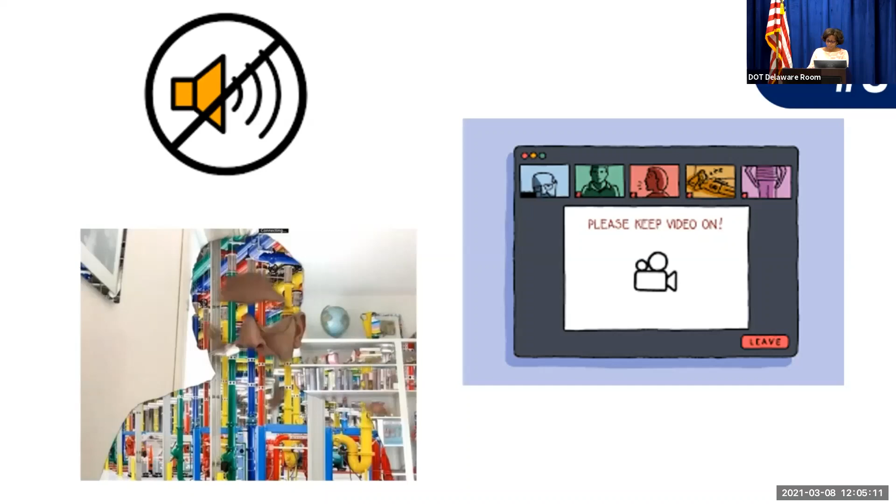I personally, when I meet with people, I like to be able to see their faces. Obviously, in larger meetings, it can be a little more challenging, but it's really important to connect that way, especially when we have to be virtual. We've also learned that backgrounds can be funny and awful - we don't encourage them very much, but some people have come up with really creative ones. We've just learned to use the technology and make it work for us.

Number 7, and it's a serious topic: while we saw volumes plummet at times early on in the pandemic last year, we didn't see speeding and crashes go down at a proportionate rate. We were fortunate in Delaware to see a decrease in fatalities year over year from 2019 to 2020, but 2019 was a very high year for us. The fact that we still had 113 people lose their lives on our roads is a big deal, and we still have a lot of work to do in safety to continue driving those numbers down.

I want to talk about virtual public involvement because that was a huge change for us. We were used to doing virtual public workshops where we might post slides online, do a survey, maybe even have a video. But trying to actually engage with people virtually was truly a learning lesson, and we challenged our teams to think differently, to get outside their comfort zones and do live Q&A on Zoom or WebEx to engage with people.

We had the 5 Points Working Group continue meeting virtually. We had numerous public workshops that had to be virtual. We even, for the Route 1 and Cave Neck Road GSI project, had AECOM develop this virtual meeting room, which was really cool - you felt like you were actually in a room with staff, walking around and touring the different boards.

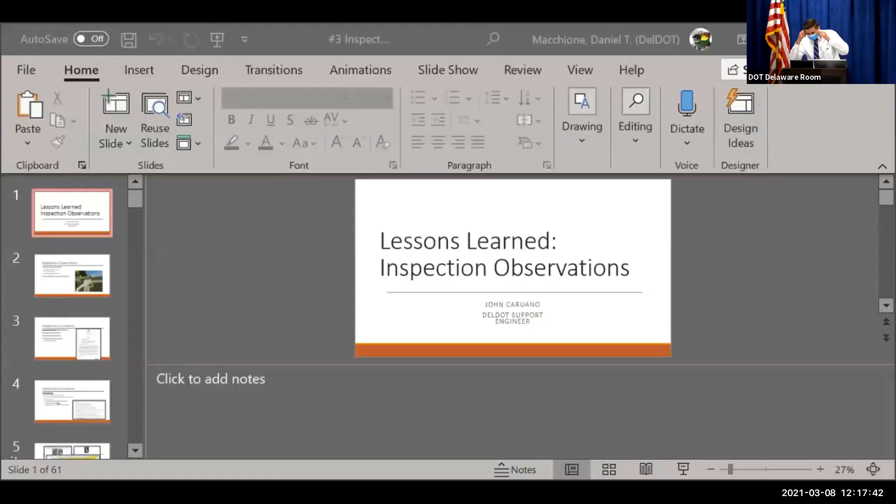My name is John Caruano. I am the support engineer, and I will be presenting on some inspection observations. I want to focus on the framework again that we talked about at the winter workshop a little bit, as well as diving into some good examples and some lessons to be learned from those primary inspections.

The framework was established to be effective March 1st of 2020, and it replaced the old semifinal and final inspections with an initial and primary. It also outlined which staff should be attending these inspections and had the goal of alleviating the multiple punch lists that were presented. The final goal is really to get a faster acceptance of our projects, and we did that through the use of timeframes established in that framework.

The initial inspection was supposed to be completed by the administering section prior to the contractor demobilizing or substantial completion. The administering section will then create an initial punch list of items. They're to include E&S deficiencies, ADA inspection results, safety and bridge management list. That list is to go to the contractor within 7 days, and the list should be an itemized list of the deficiency, the location of the deficiency, and indicating financial responsibility.

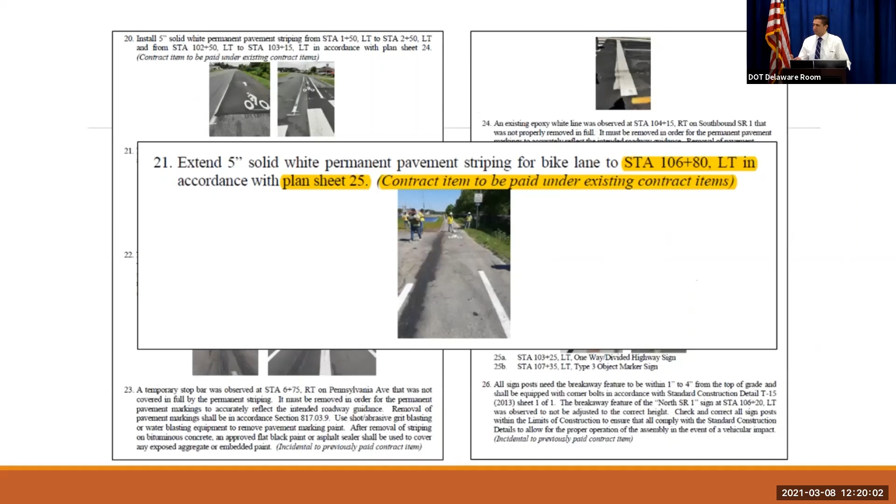The administering section is also responsible for maintaining that initial list and documenting when the contractor has made the corrections to those items. This one on top shows us the list itself with the annotation in red from the area engineer indicating that those items have been completed.

They also did the same thing on an ADA inspection where they put some notes as to how they addressed some of the ADA deficiencies and indicated when that work was corrected so that they could go and schedule the primary inspection.

The primary inspection, again, is scheduled once all those initial list items are addressed, and you'll coordinate with engineering support to schedule that date, and then you'll invite those other groups that are listed on there. You'll meet on site, walk the project, review it, identify additional items that might still be outstanding, discuss the list at the end of that meeting, and then the administering section will create a primary punch list and send it out within 7 days to those that were there attending the inspection for review, and then in 14 days it goes to the contractor.

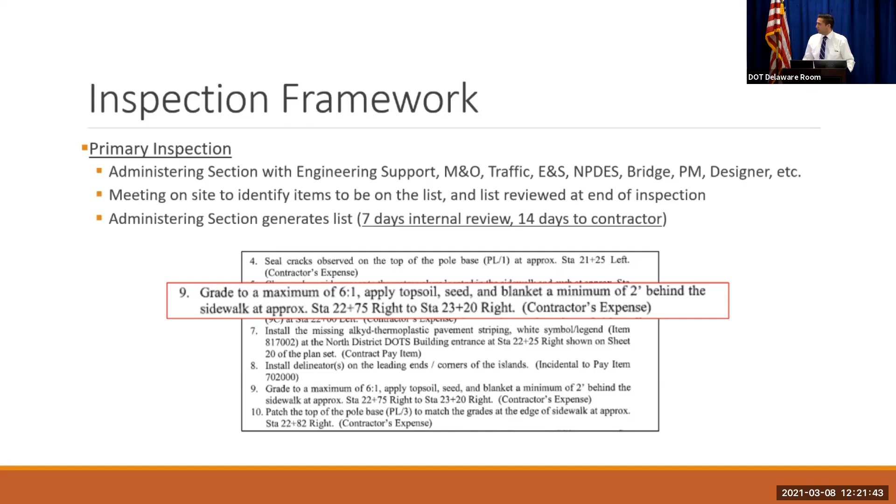Here's just another example of that primary list, telling to grade at a maximum of 6:1, apply topsoil, seed, and blanket at a minimum of 2 feet behind the sidewalk. Again, it gives you the station count, so it's easily identifiable where that is, and it indicates that it's the contractor's expense.

Engineering support attends the primary inspection, and they're there to be a resource for people, identifying specs and details, the contract requirements, and they end up generating our own reports for departmental documentation, for education, and for best practice development. So we put these reports out there identifying things we saw on those inspections and citing specs and details where those requirements are found as a means to educate people going forward.

So we have monthly inspection meetings after we put all these reports out. Right now we're averaging around, I'd say 12 to 14 reports a month. So we'll put this list out and invite the area engineers to attend, and we talk through some of these projects and what we saw on those inspections.

Jansen will go through and identify a few things that he'd like to bring up for discussion to highlight. And then those people that are present are free to discuss those items. They can bring up items that they choose to. It's mainly to exchange ideas and make sure we're doing things correctly, and identify any areas that we might need to make improvements on, whether or not we have to make an improvement to a spec and detail or a process, that could come from these sort of meetings.

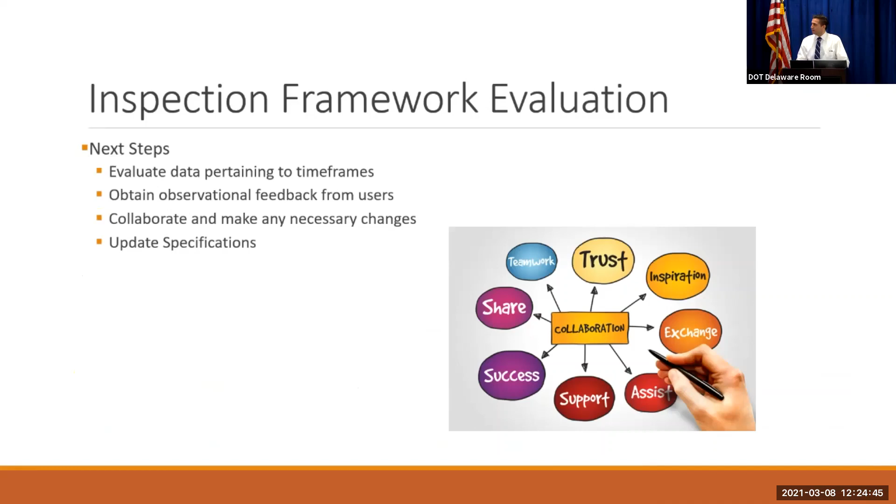So where are we now? It's been about a year that this framework's been in place, since March 1st I think I said. So we're in the process of evaluating some of the data that applies to the time frame for this framework. We're also obtaining observational feedback from some of the users to see what's working, what's not, what needs some tweaking. Then we'll collaborate with others to make the necessary changes and update the specifications accordingly.

So I did an informal poll of some construction, maintenance, engineering support, and BCA members to see how we're doing with this framework. I asked a few basic questions. One was, what are the biggest challenges you see with the framework?

Some of the challenges included getting the initial inspection prior to substantial completion - it's hard to have that inspection if not all the work's completed. The time frame to get the initial list out is hard to meet because the initial lists are going to be a little bit longer now. Also, someone expressed that they're not getting a list of items for those that can't attend the primary inspection - they're not receiving that list ahead of the inspection. And the terminology still seems to be an issue because it doesn't match the contract documents.

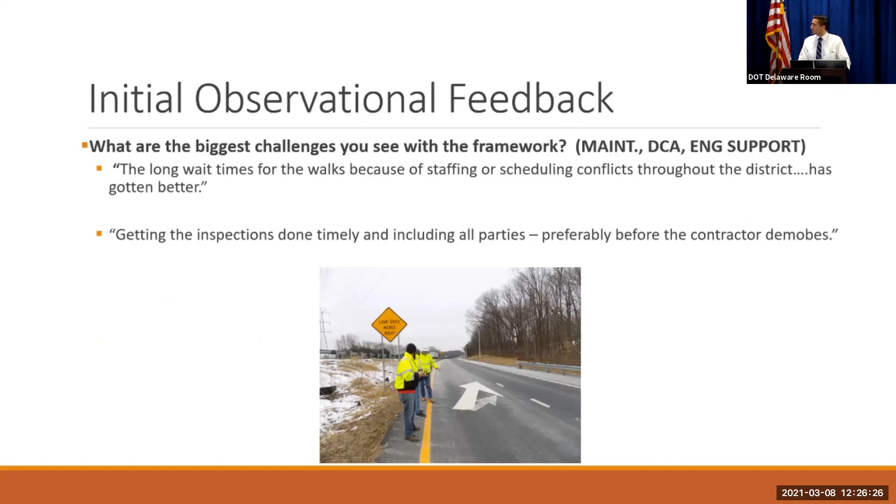All right, so what works well? People outlined that the framework adequately outlines the process and makes it clear and provides consistency for all involved. When it's early and all parties are represented, it's a lot more efficient, and scheduling the primary doesn't take as long as it once did. Somebody also mentioned they like the annotation of the checklist.

There was also an expression that the designer and engineer of record should attend the initial inspection because there's some things that can be worked out then. Also, EMS and safety should be invited to those, and the time frame for the contractor to address the initial punch list should be outlined.

These were some DCA comments. They wanted to decrease the time frames to get the official punch list from initial inspection back faster. They also thought the ADA inspection should be held before the initial.

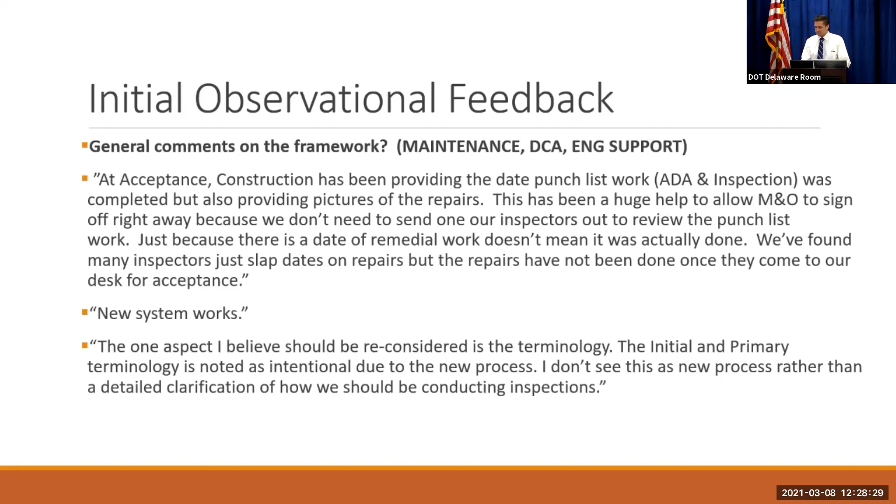So that was just some feedback. Again, in the near future we're going to be looking into the data a little bit more and going through those comments more individually. I just wanted to give you some snippets of what people had said on that informal poll. So now I just wanted to talk about some of the things engineering support sees on our primary inspections - some lessons learned, some good examples going forward.

I realize there might be a perception that engineering support comes out here to tell you what you're doing wrong, but that's really not the case. We're here not to be the police or internal affairs - we're here to educate people and make sure we're getting the quality in the product that we desire.

Does it match the contract documents? Do we follow the specs and details? Is it actually a safe installation for the traveling public? That's really the goal here, and we want to foster a dialogue. We'll ask you questions as to what was done on the project, and we can only really see what's on top, so we're going to ask you what happened underneath.

So we're here to help. We're not trying to point fingers. We're just trying to get the best out of the best product that's possible.

So here's an example of some good pavement down near Northeast Front Street. Nice paving project. Got rumble strips and nice striping.

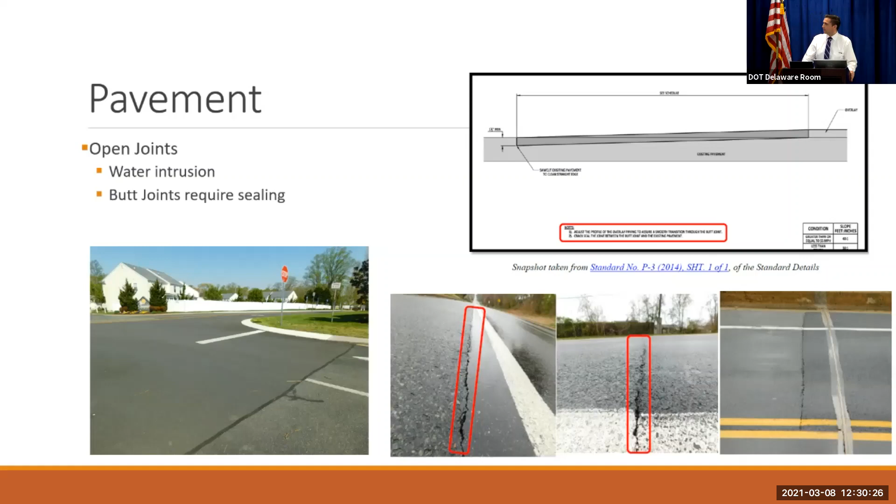I just want to talk about some items here going forward. Open joints, we've seen a couple of these along the edges of road or tie-ins or at butt joints. We're not sealing those. This could allow for water intrusion to happen. The picture on the left is a good example of a butt joint seal. If that water gets in there, it could cause premature deterioration of the roadway.

Again, some sealing, the patchwork should have a seal around it. The manholes in those pictures and junction well, those all have good seal. And there's a nice seal in the upper picture where there was patchwork done along the curb and sidewalk.

So we've seen some sumps on some of these projects. You can see in the photo there's some depressions, some even holding water. So we'll ask the question, what's going on here? Is there a compaction issue? There's a tolerance in the specifications that you can only have a quarter inch deviation in both the longitudinal and transverse direction in 10 feet, and that should be corrected. So those are some of the things we'll ask about.

Pop outs, we want to fix those. Sometimes there's a bonding issue and the aggregate will separate and pop out. This could prevent more premature deterioration of the pavement. Also, there might be an adhesion problem and we might get shoving of the pavement.

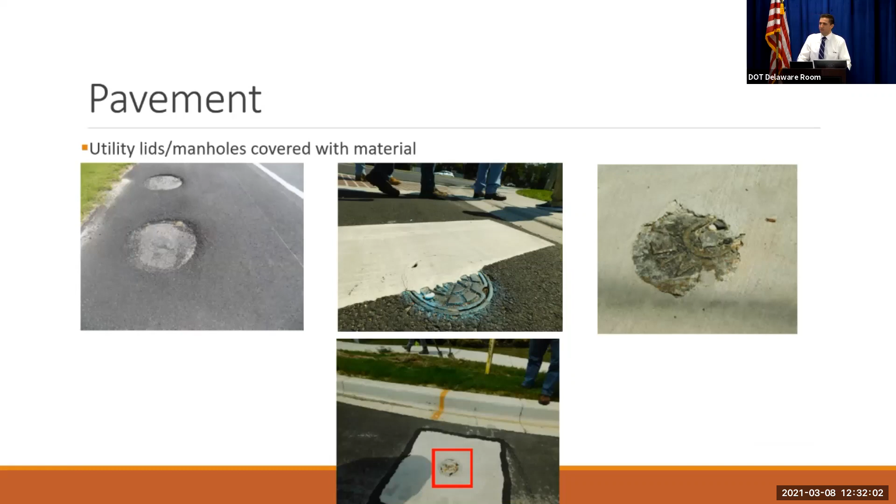Utility lids and manholes covered with material. We want to make sure that these are accessible at a later time. Can we get in that manhole if it's covered with hot mix? Or can the utility company get in there? The bottom picture is a good example of a seal around that utility. However, it's covered in concrete, so it's going to be challenging for them to get to at a later time.

Rumble strips. This is more so project scoping and design. I brought this up because you want to make sure you know what's going on just outside your project limits. Did they exist prior to the project? Does my project cut off a section of rumble strips that did previously exist? You want to include those items and details for that. Also, we realize that project development takes several years, so when you go out to PSE, you might want to double check the site conditions to make sure there hasn't been a project come through to put in rumble strips.

The same thing with raised pavement markers. Make sure we include those items. Make sure they have the right lens colors and orientation. Between two lanes going in the same direction, they'll have the white color, but down the center line you'll have the yellow. And this installation here on the left, there's a little bit of epoxy covering the lens, which makes it difficult for the traveling public to see the lens. So it's losing its effectiveness.

Signs, everybody's favorite. I kind of left this in for Jim Pappas because he loves hearing about the sign sleeve height. But yeah, it's not supposed to be more than 4 inches. I'm not going to stick on that too long. And if you have the double sign blades, with the sign that's got the 6-inch height and lettering, you should have that pin assembly shown on the right there between the signs.

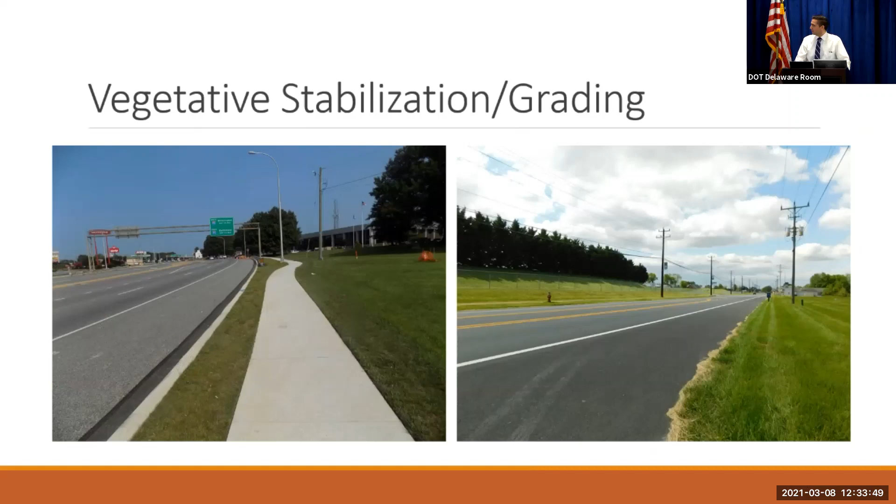Blanket mulch must be identified on the approved product list. You don't want to be using the photodegradable products. It should be biodegradable. You don't want that plastic netting in there. And it should be adhered to the surface so you don't get erosion happening underneath that blanket mulch.

All right, so we have a lot of structures out there, sign structures, light bases. We should only have the top of those bases 4 inches above grade, so we'll have to grade around some of those to make sure we achieve that. Also for utility valves, junction wells, and other appurtenances, you want to do the same. You want to grade those flush. Sometimes we have a mower, maintenance mowing operation going through there, and those could stick up and hit a mowing deck pretty severely.

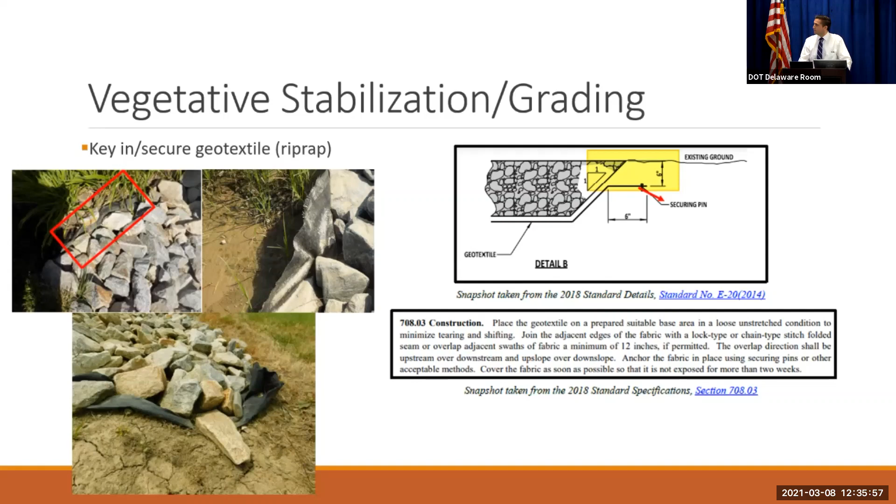And obviously, I think we should remove any sediment or vegetative buildup that is present and impedes flow within our drainage network. If you're seeing like a tree grow out of the end of a pipe, I think you might want to consider removing that, just to make sure it's going to operate as designed.

For our pipes, we recommend that the lift holes be patched, so you should be filling those in to prevent any sediment or water to pass through. Same thing with the ends of pipes when you cut them off. Some exposed rebar, we recommend that those should be patched as well to prevent deterioration. Also the safety grates, they should have their locks up on the top right. You can see that's missing.

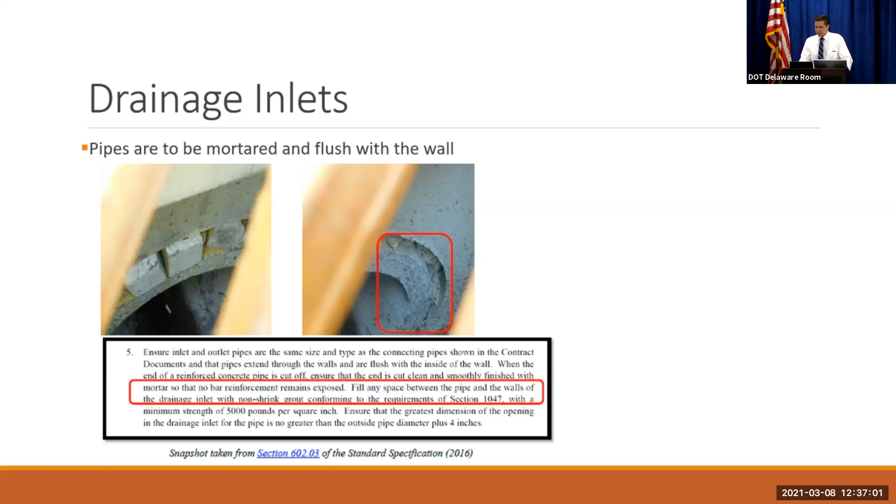Pipes, when they enter the drainage inlets, are to be mortared and flush with the wall. Use a non-shrink grout between the pipe and the wall, the DI.

So steps should be provided in drainage inlets that have a top slab or are greater than 4 feet in depth from the top to the lowest invert of the lowest pipe. And those steps are to be no more than 2 feet from the top of grade for the first step, and the bottom has to be 1 foot max from the lowest invert. The steps basically go into the wall of the box 3 inches and stick out 6 inches. Typically, they're found in the back wall of the inlet, but I think we've made exceptions because of the pipe orientation.

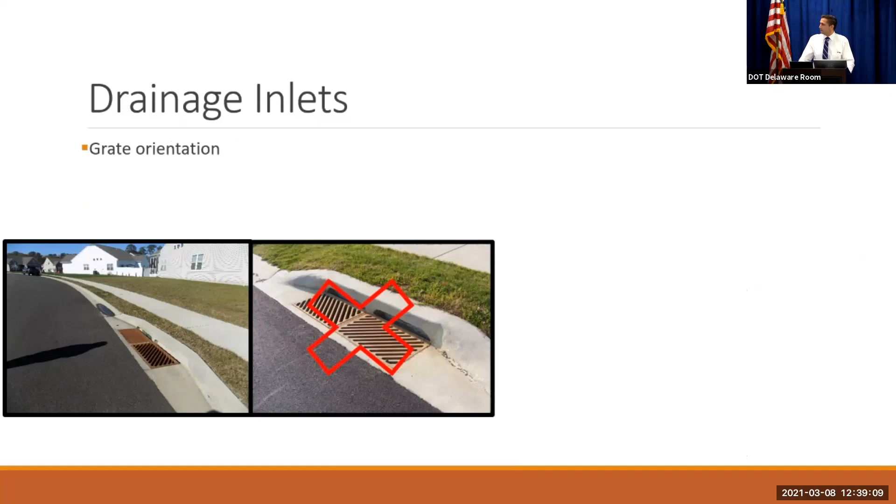Grate orientation - if I had an audience, I'd ask you which one is not correct for a sump condition. It's actually going to be the one on the right. The orientation should be pulling the water from the flow line into the structure at a diagonal. The one on the right is actually going to force water to bypass the opening a little bit, so it won't be as effective. Those are all in the standard details.

Some considerations for PCC curbs. I was focusing a little bit on design here regarding the gutter flow and drainage. We've seen some times where we just saw curb lines without the gutter, and it had some issues with conveying water down the curb line to the outfall. So when possible, I'd advise to use gutters.

Verify the outfall within the project scoping. A lot of times we tie into a certain location, but there could be a high point just beyond that location. We've seen that where you think you're matching existing, but right beyond existing, there's a higher point that causes the water to back up within your proposed improvements. So don't just limit yourself to the project area, go a little beyond to make sure that your water can drain properly.

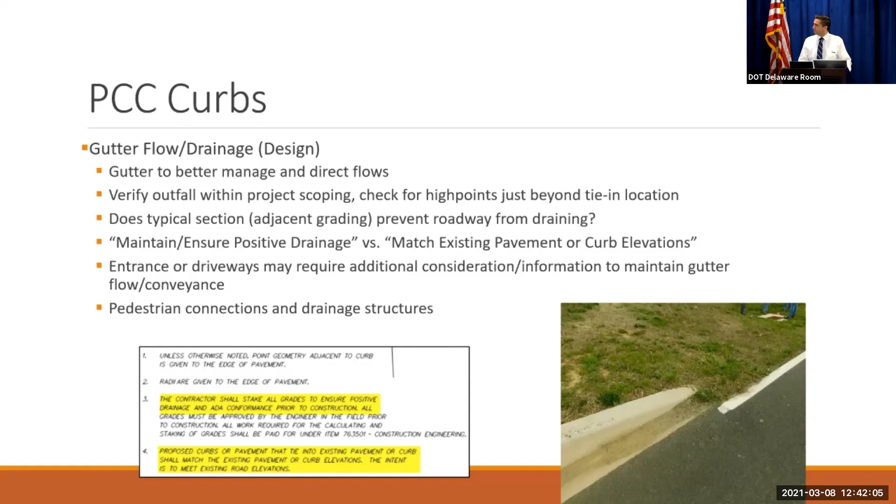All right, so sidewalk and curbs. We want to seal any uncontrolled cracks in the concrete, as well as make sure we cut joints at our 10-foot intervals. There's also the detail to provide a 2-foot at 6:1 grading adjacent to the sidewalk or shared use path.

We've also heard from the contractor that the hinge point causes some problems when you have a 6:1 for 2 feet and then down at 4:1. So when right-of-way does permit, consider carrying a 6:1 all the way down. I know right-of-way can be tight in some spots, so that's not always feasible, but apparently the hinge point had caused some issues with some contractors.

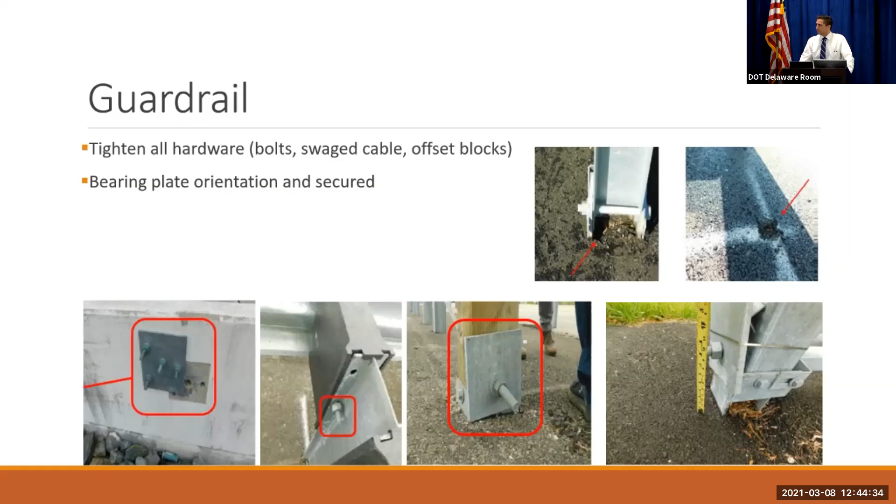Any holes that are in that maintenance paving should be filled. Even those holes in the back wall, the barrier connection should be filled to prevent deterioration of that structure.

So some other thoughts on end treatment grading. I think Adam's going to get into guardrail a little bit later, but from a design standpoint, we should ensure that we have adequate right-of-way for that grading. I think we run into some projects where we have to upgrade and we don't have the right-of-way up front, so we don't provide for that grading. If we have a little bit more forethought to consider that, that would be helpful.

Also, how does that affect the proposed drainage? I was the designer one time and I built per the detail, but I didn't think about what the drainage swale was doing behind that. So if I actually built out that grading that was necessary, what does it do to my swale? Do I have to pipe that area? So think about that.

Also, we have a detail with a guardrail with an omitted post, so you actually don't have that one post in the area where the curb opening would be. When you're doing that omitted post detail, you want to work from the end treatment back and look at your spacing, and then you can figure out where your first curb opening can be going forward.

We've also had some projects where we were just doing overlays, and it wasn't in the scope of the contract to worry about the guardrail. What ended up happening was we significantly reduced the height of the guardrail, so it's not going to function properly. So when you're doing these overlay projects near guardrail, consider doing a profile milling, or see what you have to do to maintain the 31-inch guardrail height in these sections. This also produced a bit of a lip or drop off, so you don't have that 10-to-1 grading that we had in the standard details for the guardrail. So again, profile mill when possible.

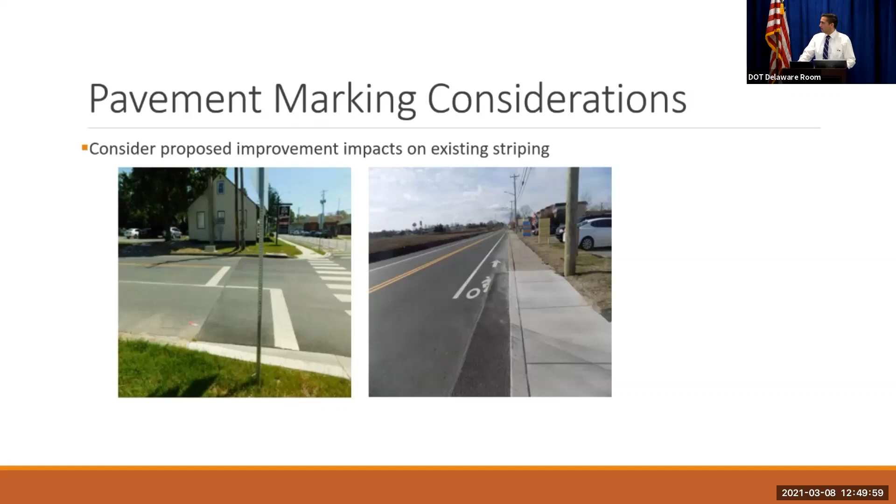We want to be putting asphalt sealer or the blackout paint on the striping removal, and then make sure we're having the right size symbols from the MUTCD for striping.

We've also seen some traffic electric service pedestals that are missing the cross member. There's a lot of equipment on these panels, and it has a cross brace member to keep it sturdy with the wind loads and everything else. Also, we've seen it where it's not meeting the 4-inch requirement for the sign sleeves. I think that's a traffic contractor issue, but if you're seeing that on the construction site, you may want to reach out to them and say, hey, you're missing the cross member.

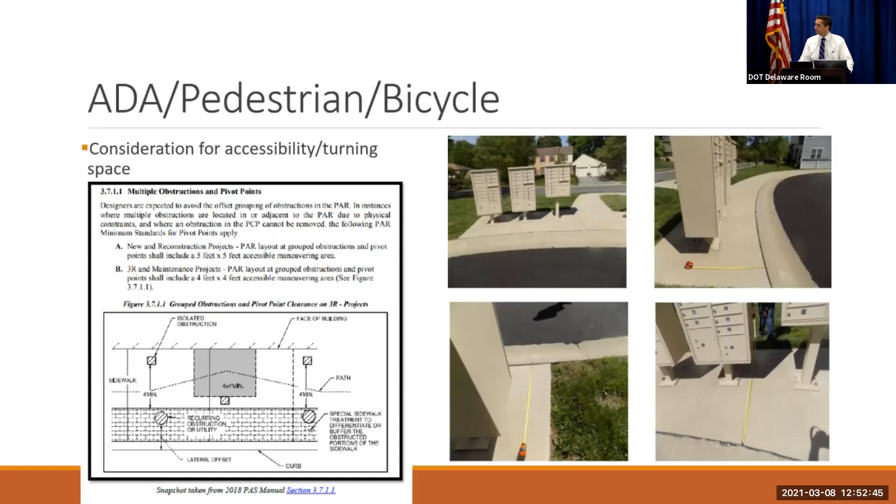Also, protrusions and vertical clearance. We see a lot of branches that overhang our sidewalks, and there's also utilities that stick into our PARs, our sidewalks. When you're scoping this, consider whether there's a way to maintain a PAR and leave the utility in place, or whether you have to do something to delineate that utility. If it's overhanging into the PAR more than 4 inches and between, I think, 27 to 80 inches, you'll need to delineate it somehow. You can use a vertical curb or delineators like a tubular marker, so that if somebody's visually impaired, they can detect that there's something protruding into their walkway. Trim the vegetation, try to avoid utilities within the PAR, and when placing signs, try to make sure they're outside of the PAR when possible.

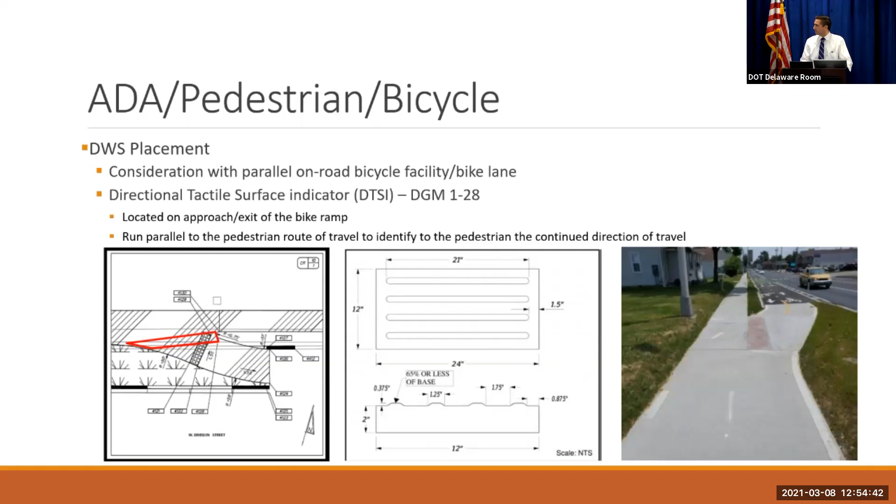DWS, or detectable warning surface, should extend the full width of the curb ramp and the fully depressed curb. This last one is kind of new - we developed a new directional tactile surface indicator. It's essentially a longitudinal DWS, located on the approach and exit of bike ramps. So when you have a pedestrian route and a separate bike route that enters or exits, we use this to indicate to somebody visually impaired that the pedestrian path keeps going forward, but a bicyclist may depart from or enter the pedestrian network there. You didn't want to just use the traditional DWS because it would direct a visually impaired person into that facility, or in this case, into the roadway adjacent to the bike lane.

That's pretty much it. Lastly, I just wanted to stress communication. I think Shantae hit on it well. I realize we're all trying to close out our projects faster, and I think communication is just key to exchanging ideas and improving processes that may need improving. So I thank you for your time.

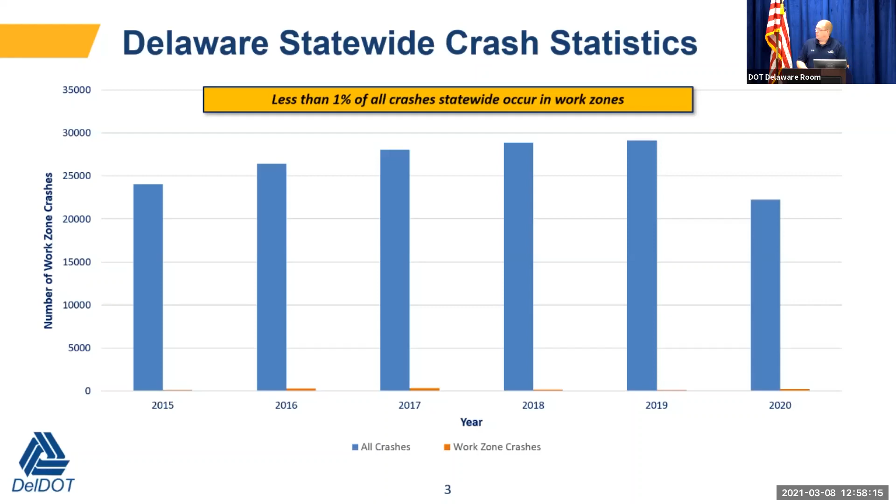We want to keep those numbers down as much as possible. We looked at all different crash severities: property damage only, injury, fatal crashes. Overall, over the last 5+ years, there were over 1,200 work zone crashes, 8 fatalities, 22 serious injuries, 229 minor injuries, and 155 possible injuries. The majority of these crashes are really property damage only, no injuries involved to any people or workers.

We do not know, unfortunately, easily how many workers were injured in work zone crashes. There's no checkbox on the crash report to indicate whether a worker was injured. We do know if workers were present in different situations, but we don't know if a worker was injured without physically reading the narrative and looking at who was involved in the crash and who was struck. So we'd need more information to determine how many workers were actually injured.

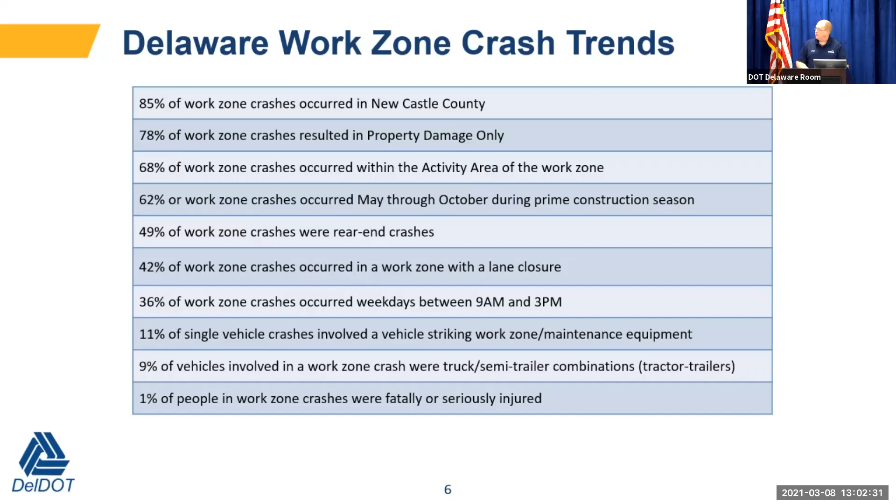So for safety section staff and responsibilities, I wanted to highlight this for Jeff and his staff, so everybody understands the responsibilities of that group and who to contact. Jeff Van Horn is the safety programs manager, and he manages the group that includes special events and hauling permits, which used to be in DMV. When I was in the section, we acquired hauling permits out of DMV, I think 2015 or 2016. Highway safety programs, which is Lei and David, are responsible for the engineering side of temporary traffic control and such. And then the safety officers are folks in the field inspecting and reviewing the work zones.

One of the newer additions, she's been in safety for a few years; she was previously in the hauling permits group and has moved over to the safety officer group. On the engineering side, Lei Zhu and David Wynn are both the engineering contacts. If your projects are in North and Central District, reach out to Lei. She's your point of contact mainly on the design side for TMPs, transportation management plans, detours, coordinating plan reviews, those types of things. David Wynn handles Canal and South District projects, as the point of contact for TMPs, detours, etc., for those project locations.

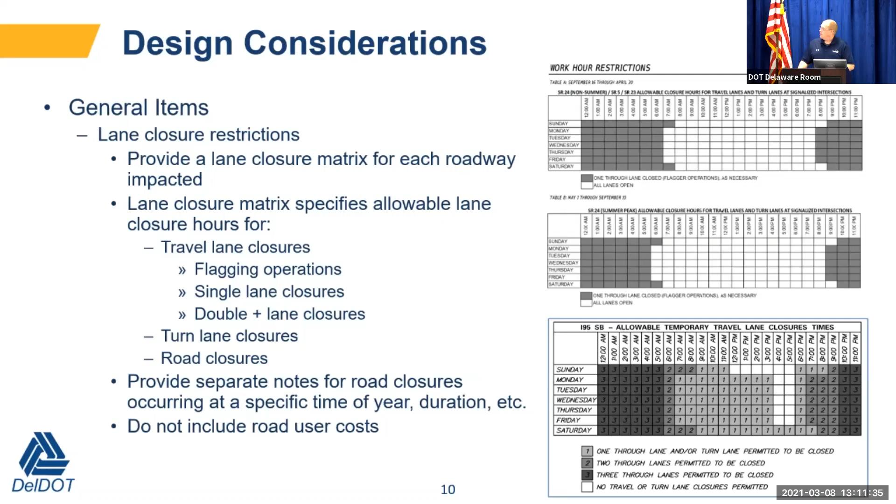TMPs, or transportation management plans. There's been a process change within safety that Jeff asked me to relay. When you're submitting your preliminary plans, you need to request a TMP determination from the safety section. That request will go to David or Lei and Jeff Van Horn, depending on which district your project is within. The draft TMP should be submitted at semifinal for review. Your final TMP for signature is submitted at final or just prior to PS&E.

When you develop your TMP, especially for a larger project with a lot of additional stuff the contractor has to do to mitigate traffic, make sure any TMP requirements that fall on the contractor are included in your MOT plans. So if the contractor is providing message boards for regional diversion routes or other devices, or having to pave a detour route in advance of closing the road and putting traffic on a detour route, make sure all that is noted in your plans, because generally the TMP document is not part of the bid documents. So the contractor won't see that unless it's in the plans. Make sure all that information is included in your plans and estimates, and you've got the cost covered in your project for that.

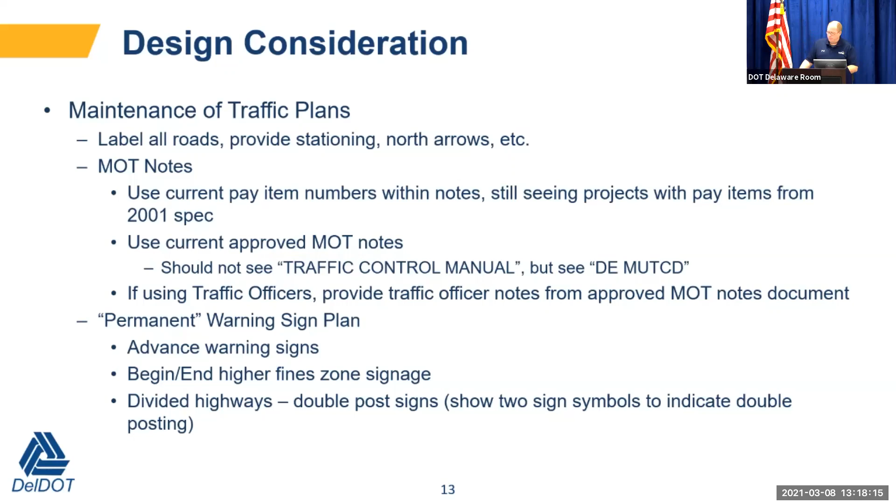On your phasing plans, for pavement markings, we want to make sure that any of the striping that's going to be placed or removed is clearly noted on the plans. There are some inconsistencies when we look at one plan set to the other as far as which striping is going to be removed or placed in a temporary situation.

Make sure that where your temporary striping ties into your existing striping, you have a label that states as such, tie into existing markings. Make sure we're showing that existing striping so we can see how that all ties in. The goal is to make sure the striping makes sense from a road user standpoint and provides a clear path for the road user.

If you have projects greater than 30 days or durations of phases greater than 30 days, consider using the permanent striping items but in a temporary fashion. So in your striping legend or striping schedule, you would have epoxy or thermoplastic markings instead of temporary paint in those situations. The goal there is to minimize the need for the contractor to go out and repaint the lines every 2 weeks.

It will save the department money. It keeps the contractor safe as far as not having to put additional crews out on the roadway to maintain those markings, so keep that in mind. If there's any questions or need for additional guidance on that, contact the safety section. They can help out with that.

I believe Jeff, we had talked about it internally. I believe Jeff may be working with engineering support to probably try to get some additional pay items for those. I'm not 100% sure on that, but I think that email went out. I'm looking at John, he's kind of nodding his head.

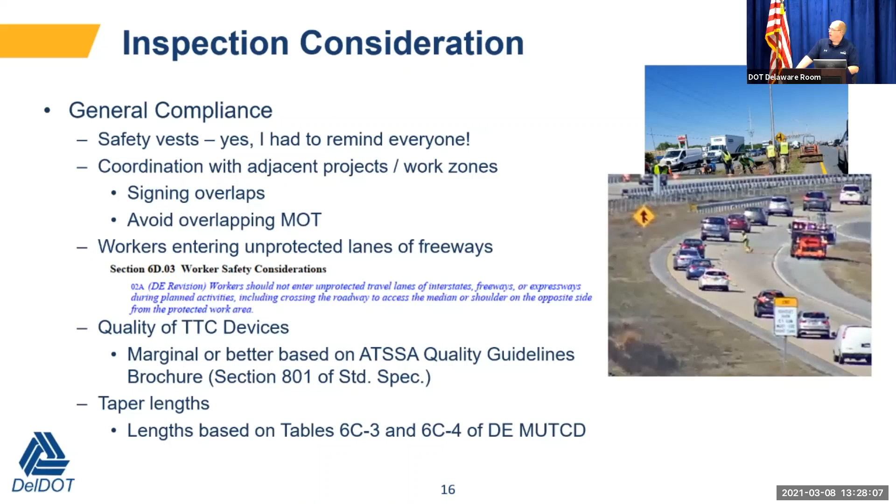We were able to get a picture of this from one of the cameras of this guy on Route 1 trying to cross Route 1 northbound in North Smyrna. He was actually putting his hand out to try to stop traffic while he was running across the street to grab a sign and pick it up.

Quality of temporary traffic control devices. Make sure that, per section 801, our devices are marginal or better based on the ATSSA quality guidelines brochure. So that needs to be addressed in the field.

And then taper lengths. I was asked to mention this as well. The lengths need to be based on tables 6C3 and 6C4 of the MUTCD. They need to be as long as possible to allow for proper shifting of traffic or proper merging of traffic approaching a lane closure or a lane shift.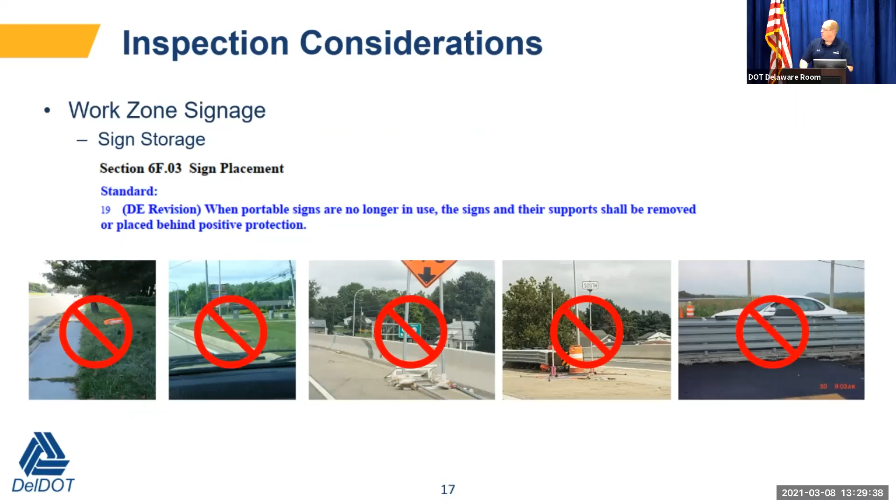Work zone signage, sign storage. At the end of the day, when your signs are no longer in use, they shall be removed from the roadway or placed behind positive protection. So, where we place them - behind the sidewalk, behind the curb, I'm not sure what's going on there. In front of the impact attenuator with no sign on it, or my favorite, on top of the impact attenuator that will go through the windshield when somebody hits it. Those signs need to be removed at the end of the work shift, put back in the truck, put back in the yard somewhere, or placed behind positive protection, not on top of positive protection.

Sign placement, make sure we're using the correct sign. We've seen situations where we try to take a sign and maybe rotate it a different way and try to put it in place for something where it doesn't mean, it's not used for its intended meaning.

We had one recently where somebody took a stop ahead sign, flipped it upside down so the arrow was pointing down, and it was at a stop line for a signalized intersection with the intention of meaning stop here on red, but that definitely doesn't get the meaning across. Unfortunately, I had a picture of that, but it wasn't clear enough to put in the slides.

Make sure we're placing signs in accordance with the MUTCD and appropriate typical applications. Make sure you're using the proper signs shown in the TAs for your lane closures or lane shifts. Ensure that when you're using sign stands like the high pro sign stands, you orient them correctly. For the high pros, it's important because it's how they were crash tested. The short side of the base is installed towards approaching traffic, so the longer side of the base is positioned downstream of approaching traffic.

Make sure signs are visible to motorists. We don't want signs covered by trees or anything like that. And obviously no blocking sidewalks with signage. We want to make sure that pedestrians have a clear path, especially for ADA requirements. We want to make sure the folks that have wheelchairs or are visually impaired have clear paths to walk along the sidewalks and aren't being obstructed by a temporary traffic control sign.

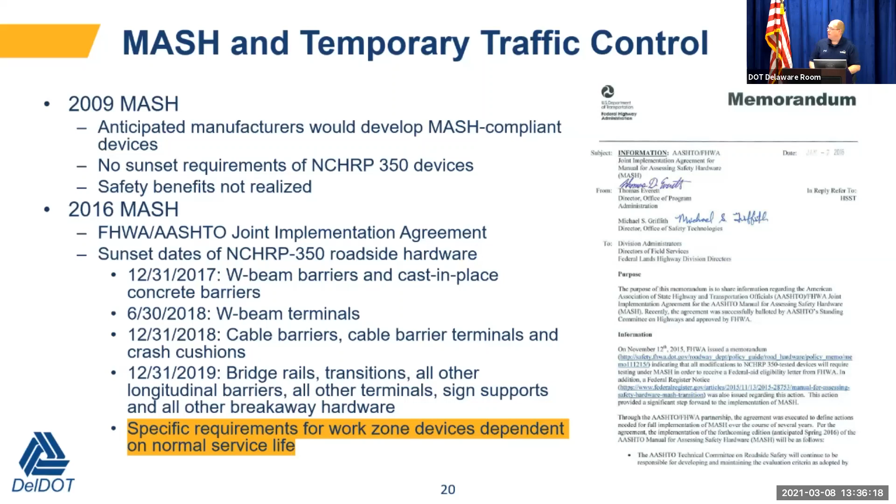Because of that, working with the MASH committee, DelDOT wanted to look a little bit further at this. So in general, from a federal standpoint, devices manufactured after December 31st of 2019 must be successfully tested to the 2016 edition of MASH. So any new devices being manufactured right now all have to be MASH compliant, and that goes for sign stands, type 3 barricades, TMAs, etc.

Devices that were manufactured on or before December 31st, 2019 and successfully tested to NCHRP 350 or the 2009 edition of MASH may continue to be used throughout their normal service lives. So that means the department really has to think about what is the normal service life of these devices. Well, if it gets struck, not long. But for things that don't get struck that often or haven't been struck, we want to realize the safety benefits of MASH, so we want to try to get some of this older hardware off of our roadways.

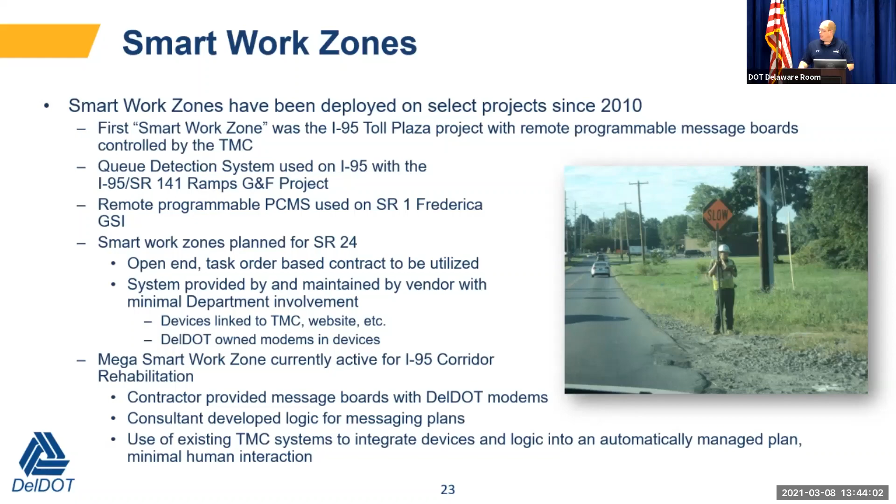If speeds get less than 35 miles an hour on 2 or 3 different detectors on 95 approaching the work zone, then the first tier of messaging is activated. The intention there is to divert traffic off of 95, put traffic on 141, 495, et cetera. If travel times increase on those roads, then the second set of messaging is displayed to motorists, and we try to use other diversion routes like Route 7, Kirkwood Highway, or Route 4. That's in place now, and I have some screenshots of what that looks like.

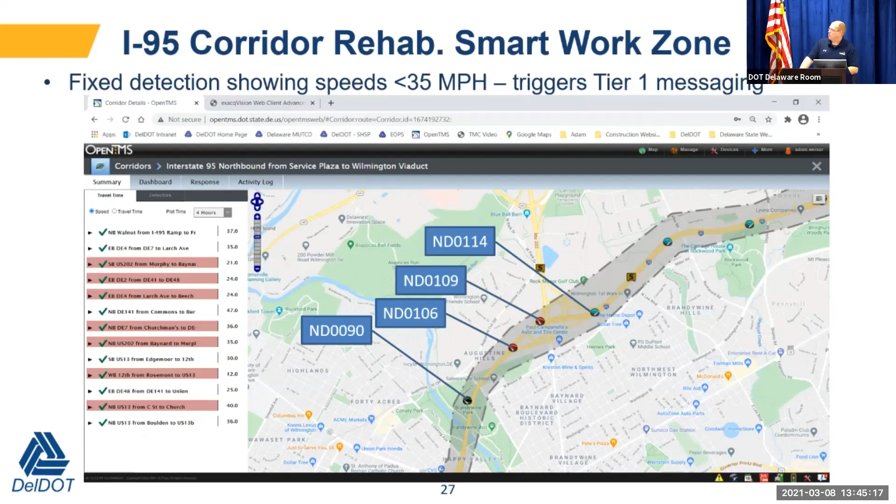The 4 detectors highlighted there are the 4 that were to trigger the first tier messaging. All 4 of those detectors needed to show speeds less than 35 miles per hour. Once we reach that threshold, then the first tier messaging is activated. This is the log that we see in OpenTMS that shows when those messages were activated, and it was around 14:45, or 2:45 p.m., that the first tier messaging was activated.

What ends up happening is we see those messages will activate. In this case, I think the messages were activated for about 5 minutes. The speeds on the detectors actually increased a little bit. The congestion was slightly reduced, and the messages went back to the original messages that were displayed prior, just informing road users of the road work ahead.

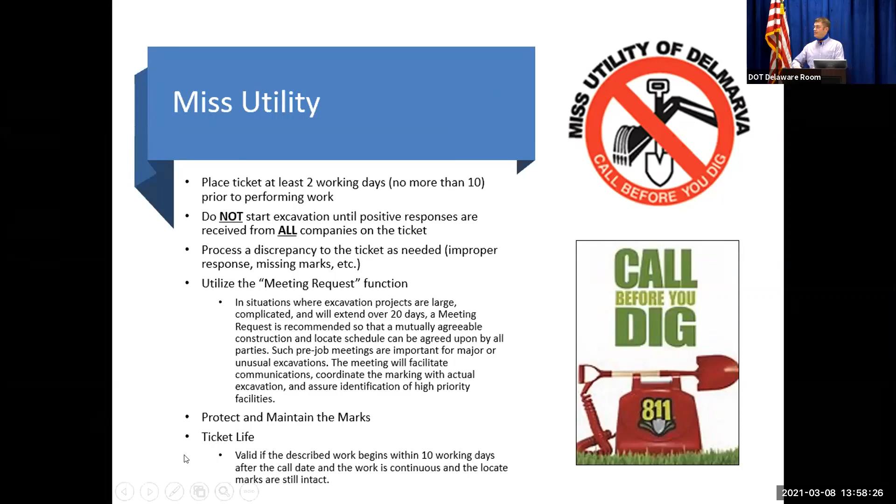So private versus public. It's entirely possible within the project limits of any of our highway projects that you're going to come across facilities that are not owned, operated, or maintained by utility companies. In our world, we'll call those private utilities. Essentially, that's something that's owned or the responsibility of a property owner or a different entity.

Typically speaking, those entities will not be members of Miss Utility, so you will not be receiving marks. For instance, a lateral that runs from the sewer back to a house, you're not going to receive marks once that lateral leaves the right of way. I'll get into that a little bit later. And once that leaves the right of way, it's the property owner's responsibility.

The only way to obtain that information in a lot of cases is to actually get it from the property owner. We don't usually have records of this information. In some cases, when we're coordinating with the utility companies during design, we'll be able to get cut-in cards or something that might indicate where they have service connections. But then once it leaves their responsibility, we don't know what it does.

So then how do you find it? We'll utilize subsurface utility engineering during design, and in some cases that might help us understand and find the facilities. Again, sometimes the utility companies might have something, but really the only way to find a lot of these is to talk to the owner, usually the property owner, to find out what they have on the site. That is not something that's handled through the utility side of the world, and it may be something on projects where discussions need to happen between the design side and the real estate side.

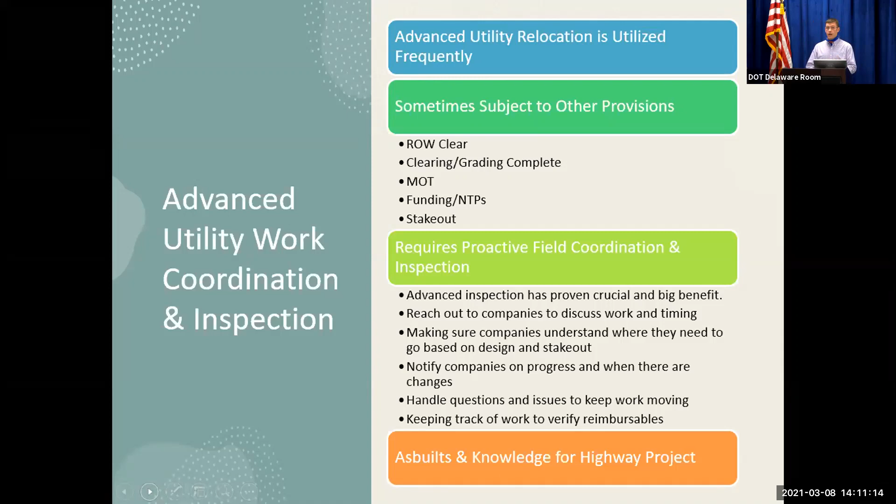And then ultimately, if we have reimbursable work on a project, we're going to want to verify that all of the items that we're paying for were done as they should have been. So my side of the world will end up going back to whoever the inspector was to verify the work happened and that the reimbursables are okay before we pay the utility. And then lastly, just trying to be able to obtain some as-built information and having a knowledge for what's happened on the site for when that highway project comes into the picture.

And then jumping into when the highway contractor comes in. The highway contractor needs to coordinate with utility companies as outlined in our standard specs and in accordance with the utility statement. They need to provide advance notice when needed. Again, that's part of the utility statement. It typically gives the amount of advance notice each utility company requires.

And that needs to be done by the highway contractor. They also need to notify companies of any anticipated changes or approved changes. Again, getting back to what I said in one of the previous slides, this becomes crucial. If something changes, it could greatly impact what was anticipated from a utility relocation standpoint. Either it could make it so utility companies can't perform the work they were trying to do, or that the contractor has now made it so the utility company can't work because they're working in the same area.

And then lastly, just coordinate and communicate with companies throughout the project. That's crucial. As long as communication is going well, then we can get through a lot of issues or concerns. So that's it. Hopefully that provided some helpful insight. I'll take any questions if we have any.

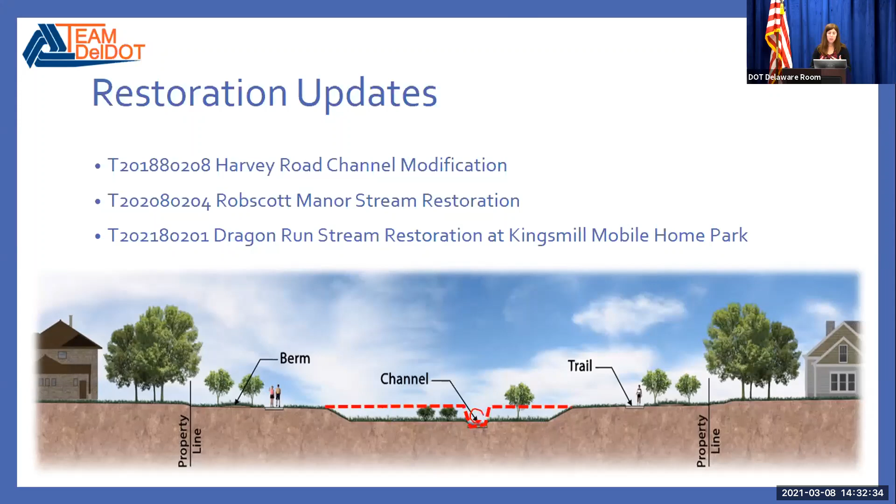Currently, the stream is very incised with steep side banks, and that creates a lot of erosion in the system, as when it rains, all that storm energy is contained in the side banks. It can't release out.

So switching gears into our BMPs, which is short for best management practices, a nickname for permanent stormwater management facilities.

During the course of 2020, we inspected 625 BMPs that DelDOT maintains. That number has stayed relatively the same over the last couple of years, even though we have been accepting projects that have BMPs in them.

We've also worked with PCC and Tull's, who handles the Service Plaza, and eliminated some of those BMPs from our maintenance records because they're maintained by other entities.

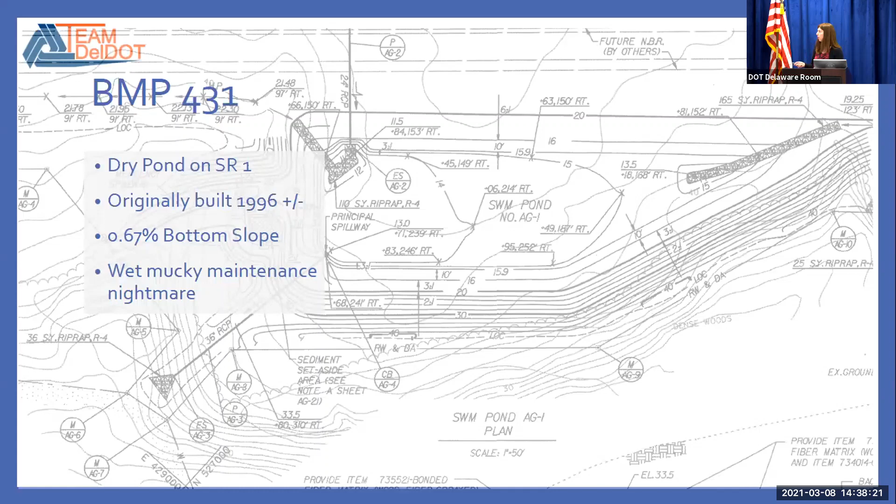The theme of these dry ponds is when you have a very flat bottom slope, they turn into a wet, mucky maintenance nightmare. They don't drain in between storms. They're very saturated, so it's difficult to mow. If we do try to mow, the mowers might get stuck and start rutting up the bottom, which causes more ponding. Then cattails and phragmites love that mucky, saturated soil, so they start moving in, and eventually we get a BMP that looks like this, or worse.

So we came in and put in a low flow channel through the center of the pond, and that provided almost immediate relief to the system. The basin bottom's now dry in between storms. They can mow it. It's really holding up well.

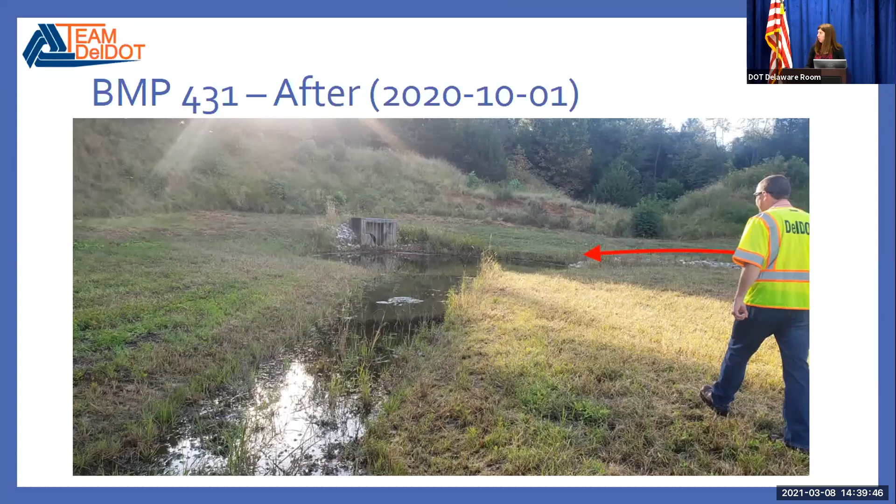This goes back to the original design of the pond. The discharge from the outlet structure was put mid-hill. It was towards the lower end of a steep gradient, but below it is still a significant enough gradient that a large amount of erosion resulted downstream of the riprap protection.

So it's an important topic. I think I've stressed this in other lessons learned or BMP talks that we can't be discharging mid-hill. We have to be bringing that conveyance all the way to a stable foundation at the bottom of the hill. If not, erosion is going to result and we'll have to go back.

Unfortunately, at the time, the erosion is outside of our right-of-way, so an easement would have been needed, and we didn't have enough resources to include it at the time, mostly time-wise, but it's on our list to eventually go back to.

Switching gears to BMP 143, this is on Route 141. This was built in 1987. The details on the plans are pretty much non-existent for the pond itself, but based on the inverts of the incoming pipes and the outlet structure, it was designed with a zero slope in the dry pond.

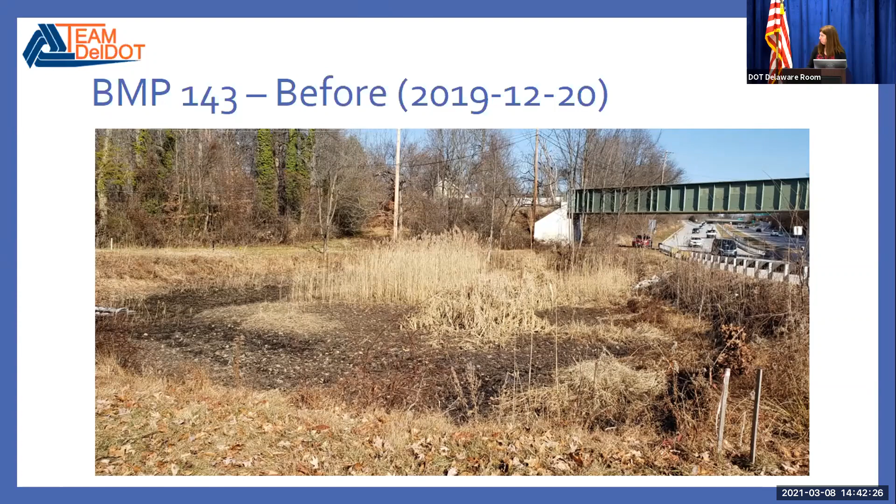The goal of the retrofit was to convert it into a wet pond by placing the permanent pool just under the existing dry ground bottom elevation, and we added benches for depth.

Originally, the design plans called for a new principal spillway and emergency spillway. Unfortunately, just following the utility presentation, a gas line was not marked during the design stages of the layout. Luckily, prior to construction, it was located, so we were able to do a test pit and determined that the elevation would not allow for the emergency spillway to be constructed, since the gas main wouldn't have enough cover over it.

So we ended up leaving the existing outlet structure in as the emergency spillway and cut additional weirs into that box. We were still able to add the new principal spillway because the storm drain pipe was located below the gas line, so we could backfill and still have enough cover.

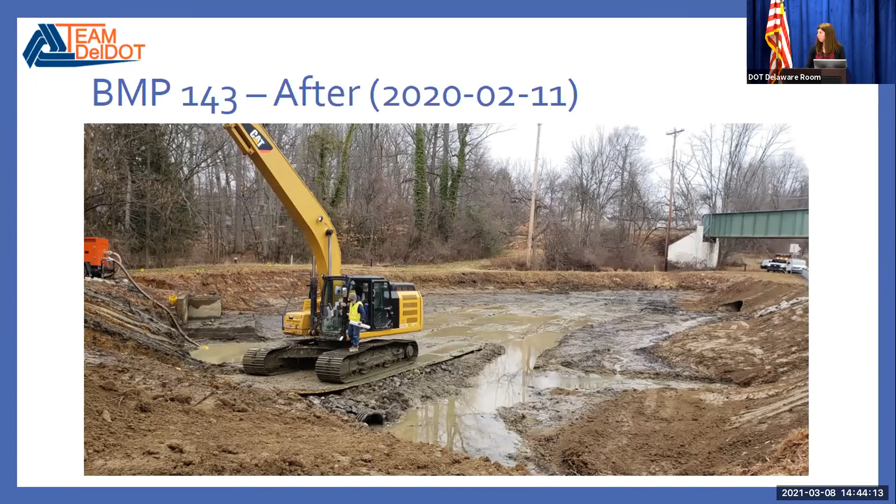But they did a great job. Here you can see it starting to take form with the permanent pool and the safety benches. You can see the two outlet structures in the back, the existing and the proposed one, and then the pump there that they continually had running while they were working.

That's one of the lessons learned. They originally didn't have the bag located on a stable base, so we added a poly liner underneath to make sure we weren't causing erosion problems by pumping. They had to change that bag up pretty frequently due to the amount of water they were pumping to do the construction.

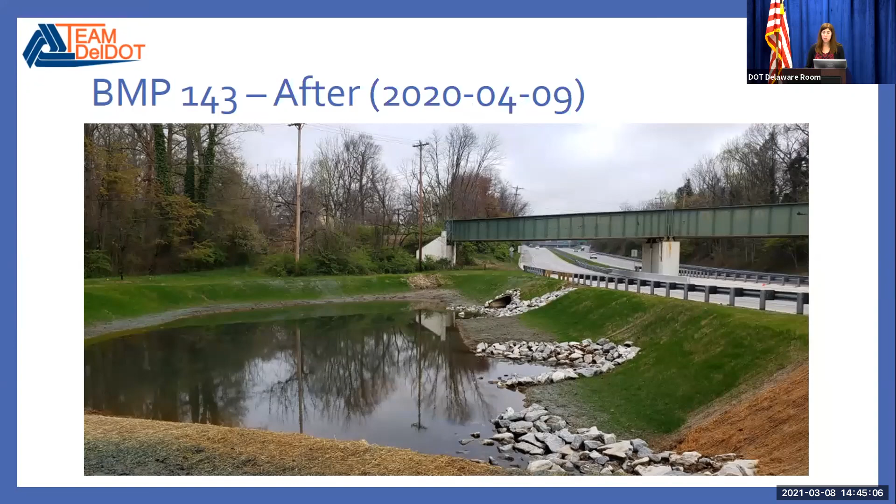But luckily for the time of year, springtime last year, we got great initial stabilization for the project. Here's a view looking at the two outlet structures where we modified the existing one and added the proposed one.

And here's a photo from this fall. You can see great initial stabilization. Unfortunately, cattails and phragmites did quickly grow again, but the major reason for the project was to alleviate the standing water under 141, and that was achieved through the project.

This photo shows, I believe, one of the first BMPs constructed with the new stormwater seed mix, and you can see the initial growth of some of the native wildflowering grasses in this photo.

This photo here, I was originally going to show a third dry pond with a very similar story, originally designed with a flat bottom and then turned into a maintenance nightmare. But I cut it out due to time, though I left this photo here.

It's in the stream that the BMP discharges to. Originally the right-of-way fence was constructed across the stream, which just immediately gets clogged with debris. Then the water has to find a different way, either around or underneath, and it creates a lot of scour. So just something to think about if you're installing right-of-way fence for a project—you need to be thinking about what we're doing across streams, because just putting it right across doesn't work.

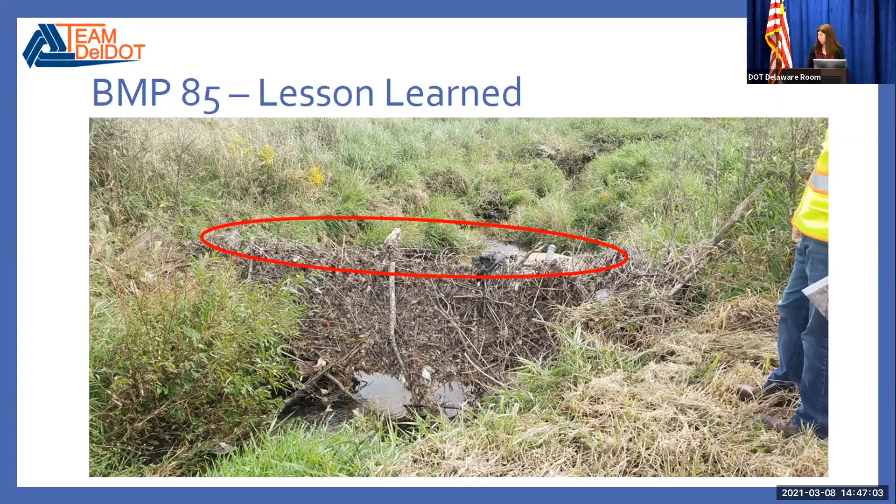So to wrap up, dry ponds must have a bottom slope. I'm going for 2% as the minimum. I know that can be difficult, but if not, it's just not viable to maintain. If you're somewhere between 1% and 2% bottom slope, maybe there's ways we can help the situation by adding in a low flow channel.

And then the other thing we're starting to consider would be biochar amended to the basin bottom. Biochar increases runoff reduction, which we've been working with the University of Delaware to study on our roadway side slopes. The thought here with the dry pond is if it's helping to dry out that basin bottom in between storms, our mowers can get in there and mow. So we're looking to start some trials.

So if you have any dry ponds that are in design and don't meet the 2% bottom slope, reach out to me or Steve Wright, and we can work on incorporating biochar into those basin bottoms. Or consider a different BMP—if you just can't get that 2%, think about incorporating a different BMP.

Moving on to infiltration basins. The first one I'm going to highlight is BMP 670, which is on US 301. It was built on a clay lens with high groundwater. It, in essence, never should have been built in its location for numerous factors, not associated with one entity. There's many reasons why, both for this location and other infiltrations across the state that aren't working.

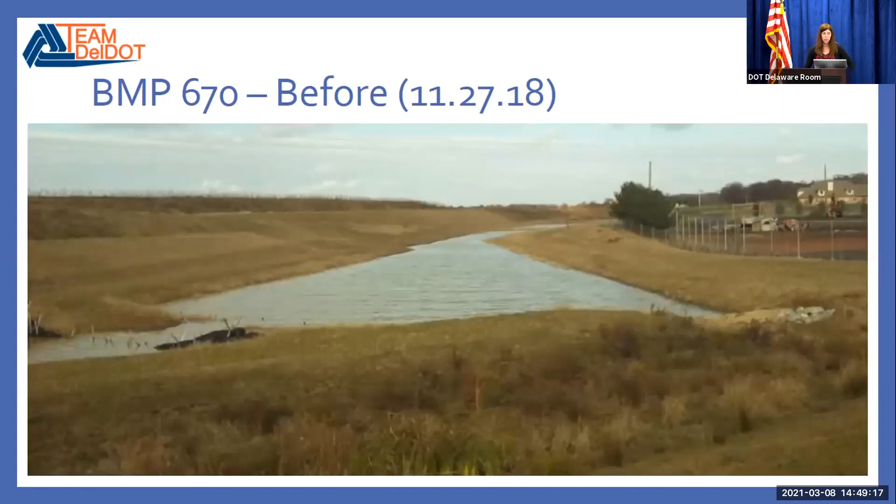But to highlight this one, this photo is from 2018. There was 0.4 inches of rain 2 days before, so it should have been mostly dry at this point. This photo is from 2019, and there was 3 days of no rain before this photo was taken, so it should have been fully dry.

This photo is right before we went in and tried to do some work in 2020, and that had 8 days of no rain before, and you can still see that it's saturated. This basin has a pretty small drainage area because it's also built to handle the future spur road off of 301, so it's not receiving half of the drainage area it's designed to. That makes these photos even worse because it's not receiving that much runoff.

Initially, construction worked with us and got some bids to put in stone trenches, which I'm going to show a project where that was successful in next. But those stone trenches, ideally, would have cut through the bad soil and allowed the water to infiltrate through them.

But the cost was very high, and around the same time, the professor we work with for the biochar research mentioned this soil fracking technology. Essentially, they drill down 6 feet and then blast high pressure air, and that air works its way back to the surface and creates fissure lines as it does that, then they accompany it with a media to fill those voids.

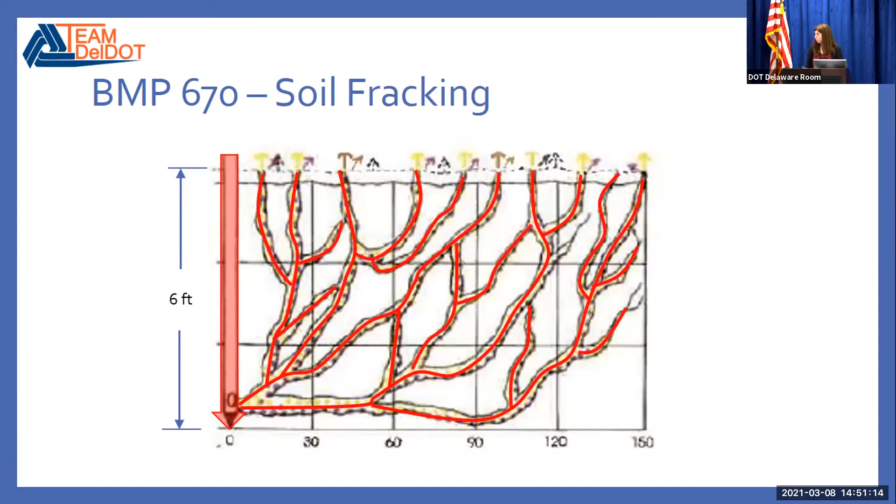I'm going to play a quick video that shows the machine in action. You'll see towards the end he kind of steps away as it's drilling down, and then when he walks back to the machine, that's when he's getting ready to blast the air. He was basically waiting for the compressor to meet its PSI, and then after he hits it and tells it to go, you can see the ground move underneath the machine as it blasts the air.

Here he is drilling down. Not sure if you were hearing sound, but if you were, it was very loud because it had a jackhammer effect the entire time due to the high clay content. Again, he's waiting for the tanks to reach the correct PSI, then watch the ground underneath. I don't know how well you saw it on the remote, but the whole machine kind of picked up, almost like a waterbed, when that air was blasted in.

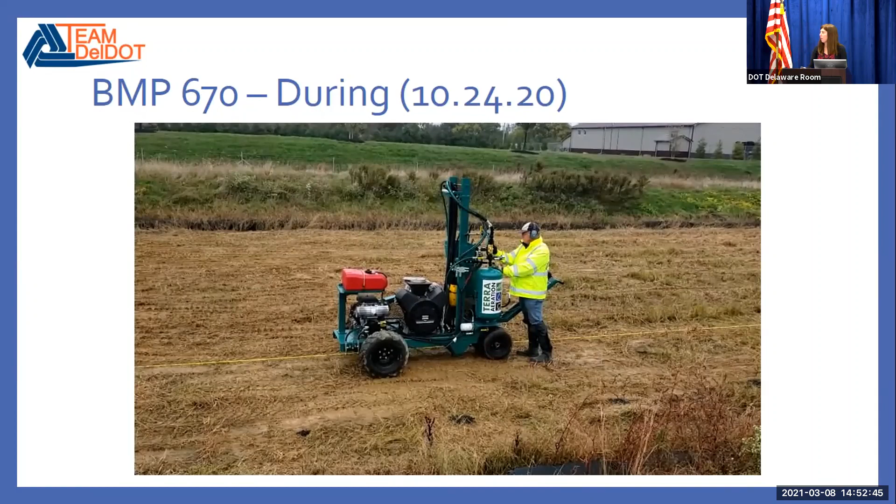I have another video, a little shorter, down more towards the lower limits where it's a lot wetter. All the flags are where they've already done the boreholes. As they drill down and blast the air, you can see the groundwater coming out through those previous holes, almost like a little geyser in between the equipment and the guy.

This photo is after—again, all the flags represent where they did those boreholes. They did a 6x6 grid throughout the whole basin bottom. This photo, it rained about half an inch that morning, so it had just rained. This photo could have been 3 days after, and the water would have been in there. Unfortunately, our trial didn't work that great; the system was too compromised for it to make that much of an impact. I am sold on the theory though, so we're looking for other locations where we can possibly incorporate it better.

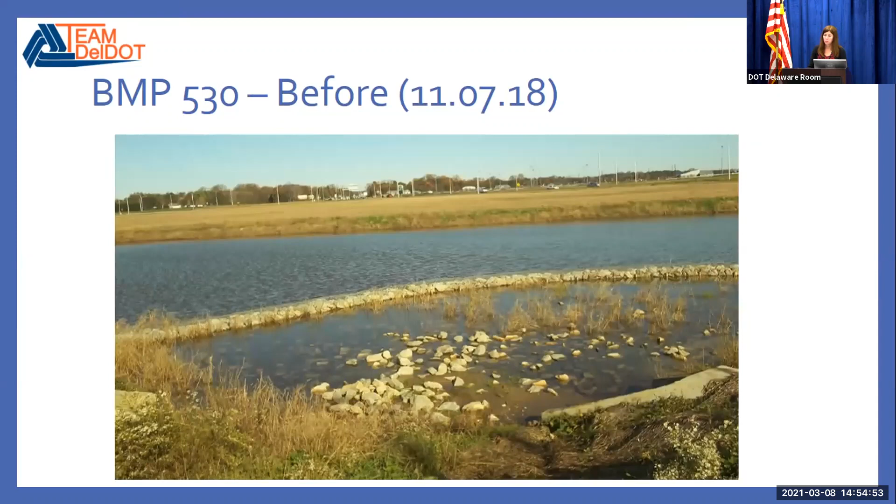Switching gears to a little bit more successful infiltration story, this is the South Frederica project. BMPs 530 and 531 were infiltration basins, on the south side or lower end of the screen, and the upper end of the screen are wet ponds. In this photo from 2018, they all look the same because the infiltration basins weren't functioning. It had a tenth of rain the day before, and 3 days before that, 2 inches of rain. So it probably should have been a little wet, but not to this degree, and construction also noted it was ponding water throughout its life.

So we worked with construction and Century to design these stone trenches that punched through the bad soil and gave a location for the water to infiltrate. We did 3 roughly 17 by 17 squares in the basin bottom, and they also disked the bottom of the basin to loosen any compaction related issues. This photo is 4 days after no rain, showing the dry basin bottom, and you can see the 3 stone trench areas circled there.

Similarly for sister pond 531, this photo is at the same time period in 2018 beforehand. For this one, we decided just to remove 1 inch of silt from the top and then disc the basin bottom. This photo is 4 days after no rain, showing the dry basin bottom. So that was promising and hopefully succeeded in rehabbing that infiltration.

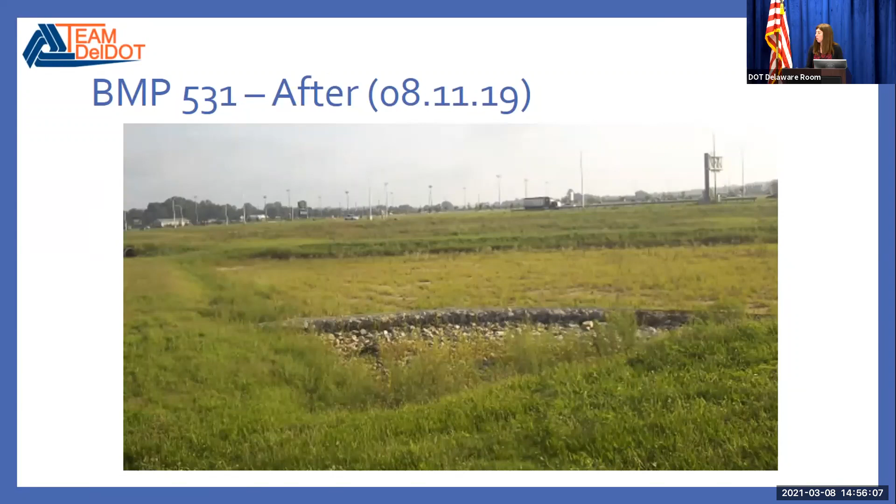So, some infiltration lessons learned. Many of the failures on US 301 and throughout the state are in A24 soils. That was noted by Vince Davis and Adam Marvin, the US 301 stormwater engineer. I think we need to take a close look at all infiltration basins, particularly A24 soils, to make sure they function long term.

Soil samples have to be taken in the basin bottom. That's a stormwater reg, but we've noticed a couple of locations where that wasn't the case. There has to be a minimum of 2 samples per facility, and the stormwater regs have been updated to include more, depending on basin size. They have thresholds, so if you have a large facility, you'll need more than 2 samples.

One of the biggest reasons we've seen failures in our infiltration basins is we weren't previously noting the seasonal high groundwater. The basin bottom has to be a minimum of 2 feet above the seasonal high. I think if we'd been capturing that in the past, a lot of the problem BMPs we've seen would have been eliminated earlier in the design process.

But all that being said, we're not alone in this — other states are seeing very similar infiltration woes. Where it works well — I used to be a huge proponent of infiltration before I joined DelDOT. It can definitely work, it's not always doomed, but you have to have the right underlying soils, and they have to be protected during construction. I've also come to realize maybe it's not smart for us to be sending our road runoff into the groundwater.

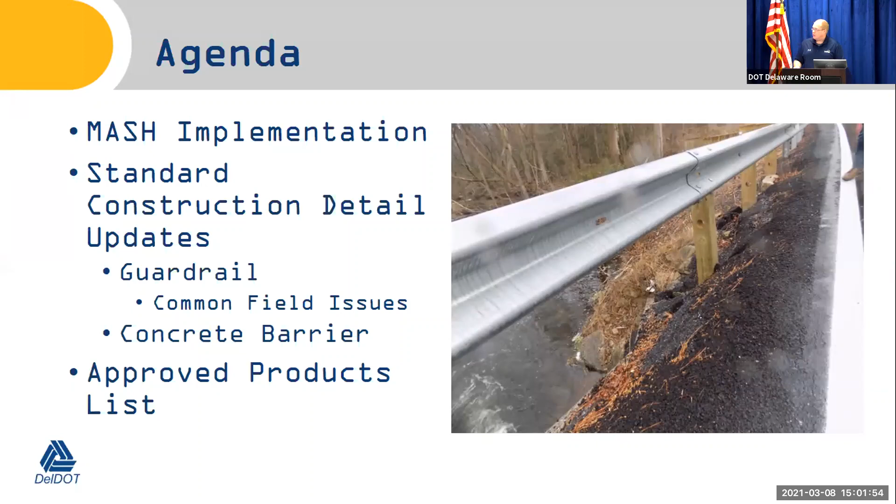All right, so I'm going to briefly talk about MASH implementation, then get into standard construction detail updates — just a quick summary of what we talked about in the training last year — and focus on guardrail and some common field issues, quickly touch on concrete barrier, and get into the approved products list.

As I said before in my work zone presentation, we have the MASH implementation agreement with the feds. We have various sunset dates for roadside hardware, and we've been past all of those at this point. So basically anything we're installing now, roadside hardware, with the exception of signposts and light pole standards and such things we haven't quite gotten MASH devices available for, like W-beam barriers, end terminals, crash cushions, cable barriers, concrete barrier, bridge railings, all that stuff now needs to be MASH compliant.

We, as the user agency, DelDOT determines MASH compliance based on some memos from the feds over the last couple of years. Obviously the policy is that all roadside safety hardware installed in the national highway system is to be crashworthy. It's the state's responsibility to determine crashworthiness and to approve new or modified roadside safety hardware that meets our needs, so we do that at the state level.

Implementation status: we're in pretty good shape with the W-beam barrier and W-beam terminals. We have the approved products list for guardrail end terminals, as well as permanent impact attenuators. Bridge railing - I know the bridge section was working hard on getting the bridge standards updated for MASH compliance, and I believe most of that's in place now. Guardrail transitions, with the last standard detail update, were brought into MASH compliance. The only thing we're missing at this point are sign supports and other breakaway hardware, like light standards and community entrance signs - those are still being worked on as we speak.

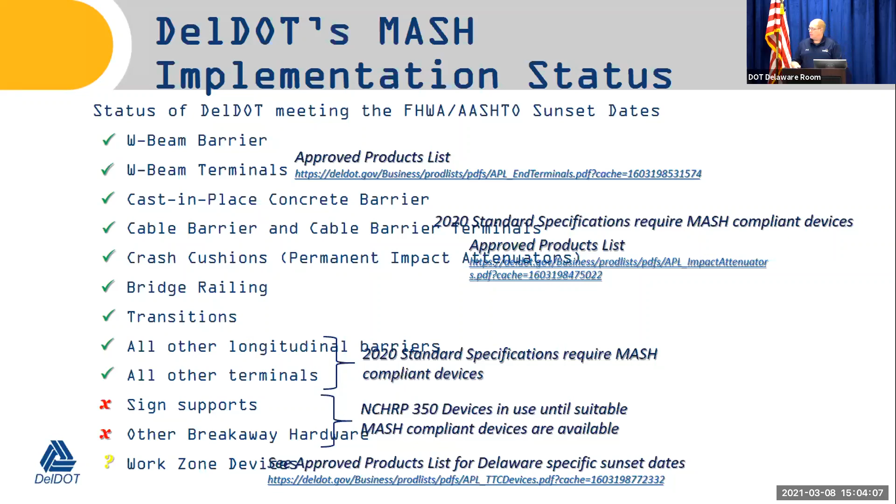As most of you know, we have a MASH committee. This is now a formal MASH committee through a policy implementation that was recently published. The primary purpose is to serve as the technical group regarding roadside safety hardware - working with the standard details, recommending roadside safety hardware for the approved products list. They will review recommendations for devices to be added to the approved products list, establish Delaware-specific sunset dates - as I talked about in my last presentation, the MASH committee established sunset dates for temporary traffic control device hardware - and review recommendations for approval of devices exempt from MASH certification.

The committee is made up of staff from various sections of the department - maintenance, construction, design, safety - so all those folks have a say in what's going on.

From a MASH committee standpoint, if the roadside hardware has approved crash testing from a recognized crash testing facility, it will generally be approved without self-certification. Other devices that don't necessarily have an FHWA eligibility letter - what used to be called a 350 letter - would require more review from the MASH committee to determine if it's a device that can be added to our inventory or installed in the state.

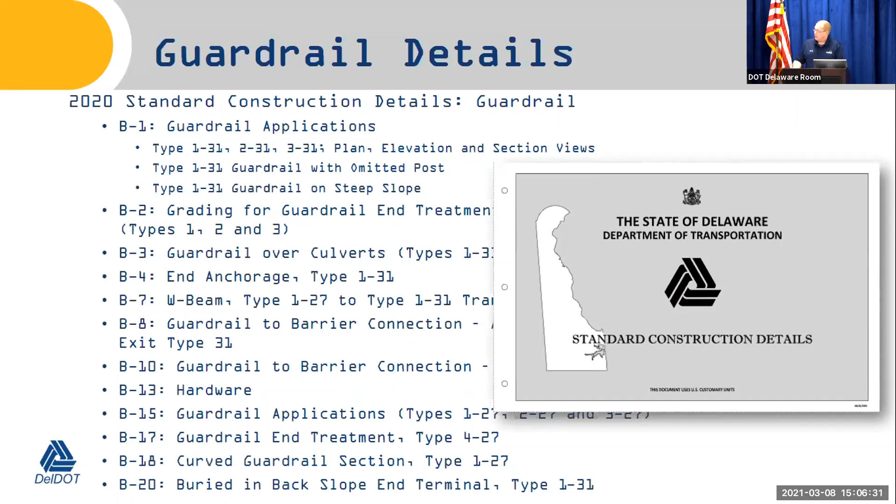One thing I wanted to note is that even with breakaway hardware - like a breakaway luminaire support, a signpost, or an I-beam sign - none of those should be located within the deflection zone of your guardrail.

There's not been any testing that I'm aware of where we've tested the interaction of guardrail deflecting into a breakaway device. We don't know how it's going to react. So in your designs or in the field, we need to make sure that we're locating that breakaway hardware outside of the deflection zone of guardrail, even if we're installing it behind guardrail. There are situations where we have existing guardrail for a slope or something, but we still may be installing a breakaway device in that area.

Different guardrail applications: type 131, the 231, which is your half post spacing, and then we have the 331, which is median guardrail. One thing to keep in mind with the median guardrail design is that we are required to use 8-inch offset blocks with the median design. That's based on the MASH testing, so that's in the new standard details. The 131 and 231 will use the 12-inch offset blocks.

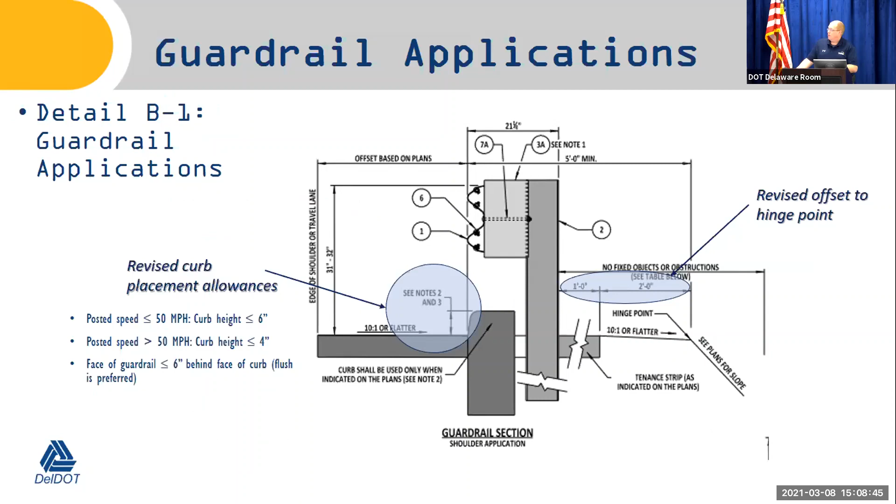On the guardrail placement with respect to curb, there are curb tolerances as far as lateral placement, as well as the curb height and the height above the pavement to the top of the guardrail, which is covered in the details. One thing I wanted to note through some inspections is we want to make sure that at a minimum, the face of the guardrail is flush with the face of the curb, but it can be set back no more than 6 inches from the face of the curb to the face of the guardrail. Ideally we want that to be flush with the face of the curb.

On your median guardrail details, as I said, 8-inch offset blocks only. We have the new curb if curb is called out on your plans. There's the new style curb, type 1-2 curb, 6-inch concrete curb that's used, and again, that's flush with the face of the guardrail.

One thing to keep in mind is when we're installing guardrail in lower speed situations, and it's going to be offset from the face of the curb, we have allowances to do that, but the height of the guardrail with respect to the top of the curb at the edge of the roadway, and then with respect to the top of the ground line directly at the face of the guardrail is key. Based on crash testing, that needs to be at the top of the curb, the guardrail height can be no taller than 32 inches, so 31 to 32 inches.

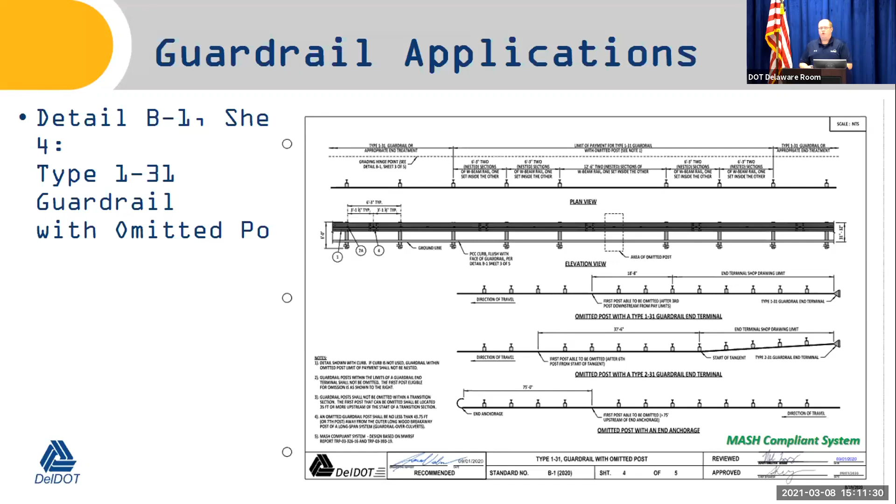John alluded to this a little bit in his presentation earlier about omitting a post and the leave outs associated with curb openings, those types of things. One thing we did to try to alleviate that issue is add a guardrail with omitted post detail. That is now detail B1, sheet 4. The post is omitted within the run of guardrail. It's one post that is omitted, and the specific location of where that post could be omitted is based on its proximity to a guardrail end treatment, a transition area, or to the end anchorage. So they can't be within a certain amount of distance from the nose of an end anchorage or from the nose of a guardrail end treatment. All that is shown in the detail.

The other thing is with curb: if there's curb present, the guardrail within the area of the omitted post needs to be nested, meaning you have to have two sections of rail nested one inside the other in that area as shown in the detail. When curb is not present, we don't need to nest the guardrail in that situation. Here's the detail showing where the posts can be omitted within proximity of an end terminal or an end anchorage.

Looking at it from a couple different options when we're omitting posts, we have the guardrail with omitted post option. We also have guardrail over culverts, and really the guardrail over culvert is reserved for areas where we're literally spanning a culvert or a pipe or something like that. We can do unsupported span lengths between 12 feet 6 inches and 25 feet. The max span length is 25 feet on the guardrail over culvert.

But if we literally need to just omit one post, we now should be using the guardrail with omitted post detail, not the guardrail over culvert. The difference is the type of posts that you're using. In the guardrail over culvert, you're using the breakaway wood posts on either side of the opening. And in the guardrail with omitted post detail, you're still using steel posts. You're just literally omitting one post at that point.

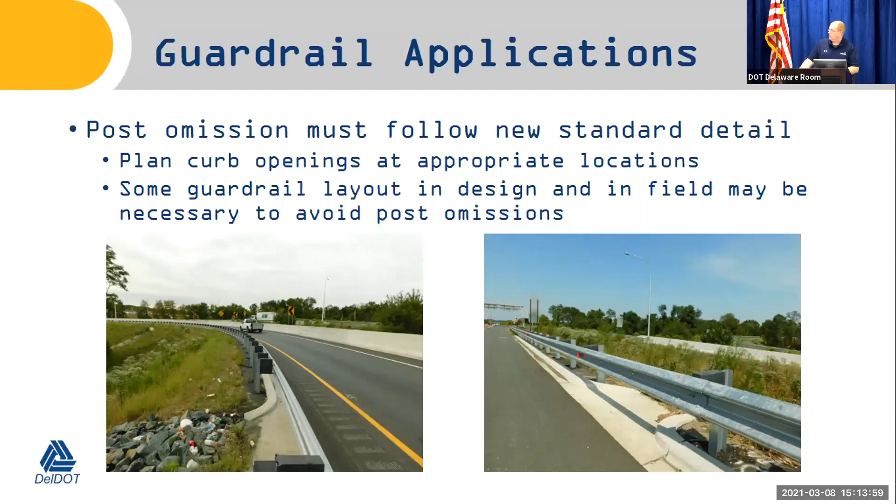Related to leave outs: if we have to install a post in a concrete area, like a curb opening as an example, the post can be installed in that concrete, but we need to leave an area around that post that's not in concrete, and that'll allow for the post to rotate upon impact.

The roadside design guide does cover this, and a lot of that was just based on NCHRP 350 testing. There was actually some recent MASH testing done by TTI that looked at both steel and wood post guardrail systems. The testing for the steel post guardrail in the leave out passed for both the car and the truck, so it meets test level 3 application.

The wood post test failed the pickup truck test. So right now, we can only do a steel post with a leave out, not a wood post. And the leave out area around the post requires a low strength grout.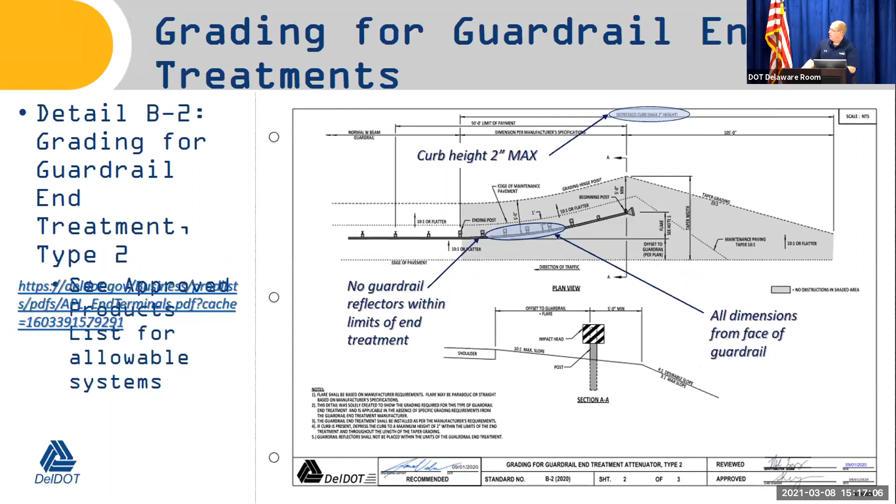It's the type 231. And then we made some substantial revisions to the 331, the median end treatment, to provide some advanced grading—a 50-foot minimum transition area in the median for advanced grading into the type 3 end treatment as well.

Some things to note here: we want to make sure that we're depressing any curb in advance of the end treatment. It needs to be no taller than 2 inches for 50 feet or 75 feet in advance of the nose of the end treatment and through the limits of the end treatment itself.

Some other common issues associated with guardrail end treatments: again, making sure our grading meets the details. The intent of the grading is to minimize overturning of the vehicle and make sure that when the end treatment is struck, it can function properly and not cause overturning because the grade behind it is too steep. Again, curb must be lowered or eliminated per the detail.

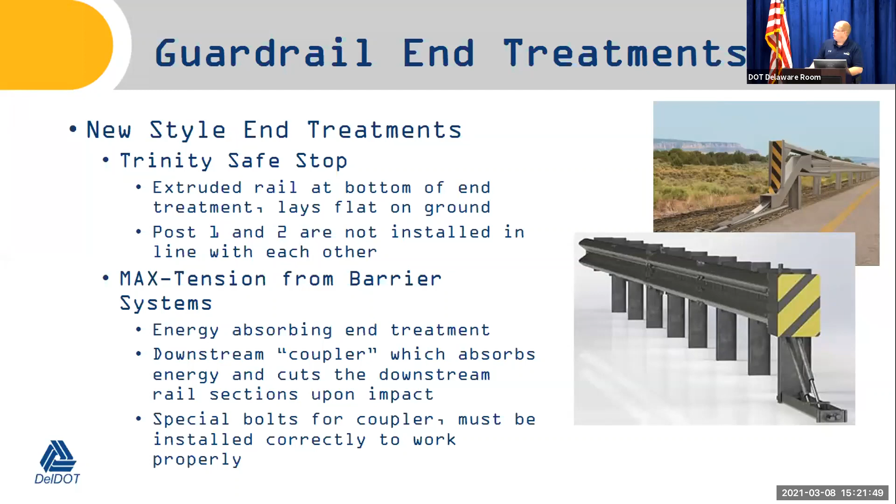I've seen situations where we have 31-inch guardrail at a sign structure, and the rail element on either side is just literally transitioned down to the 27-inch height—it should be about 28 feet for transitioning the height, and you're also transitioning the splice location. For the 31-inch guardrail, we're transitioning the splice from mid-span to the 27-inch where the splice is at the post. So keep that in mind—it's not just transitioning the height, but also the post location.

Just a reminder of the new B10 guardrail to barrier connection, the Type 331. This has a transition from W-beam to Thrie-beam, which then attaches to a concrete buttress. That concrete buttress is designed to go from a flat surface to match the shape of your bridge barrier downstream, going to an F shape or a single slope design—that's in the details as well. Just a reminder that's available for use on new construction.

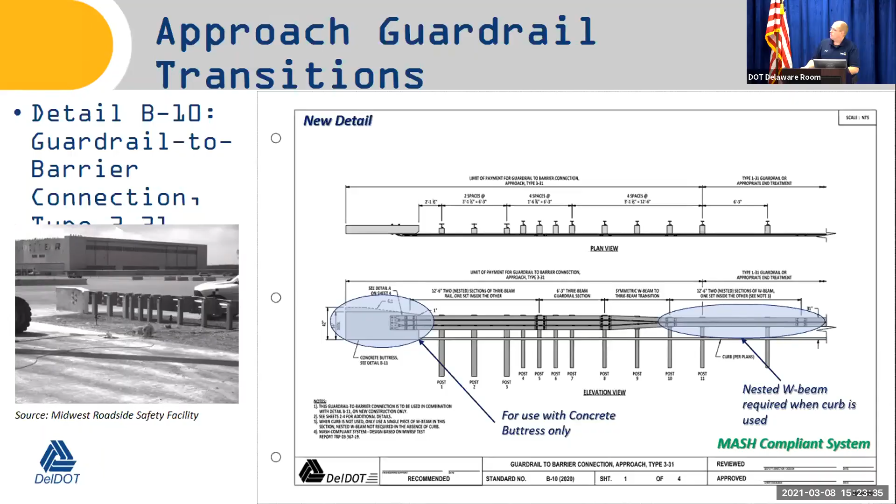Some design considerations for this: we have the Type 131 approach guardrail transition, the older style W-beam. That's to be used for existing F-shape barrier wall attachments, retrofit situations. The new detail is to be used for new construction or where it's desirable to construct the concrete buttress. If there's any questions about that, consult the MASH committee for that situation.

One reminder related to barrier hardware is related to the guardrail reflectors. We did add notes to the detail, since there's been a lot of questions in the past years about the color and placement of the guardrail reflectors. Just a reminder, make sure you're adding the reflectors to your guardrail. No reflectors are to be installed within the limits of the end treatment, and that's within the pay limits of the end treatment as shown in detail B2.

Generally, if it's a 2-lane road, your guardrail on the outside is going to have white reflection on both sides of the reflector. If it's a divided highway, the left side would be yellow facing traffic, red facing the wrong direction, and the right side would be white and red respectively. Okay, barrier.

Again, looking at the new details, we have new concrete barrier details available for use. We have 36-inch F shape and 42-inch F shape roadside concrete barrier. And then for the median, we have 32-inch F, 36-inch F, 42-inch F shape, and a 42-inch single slope barrier. Those are available for various needs for projects.

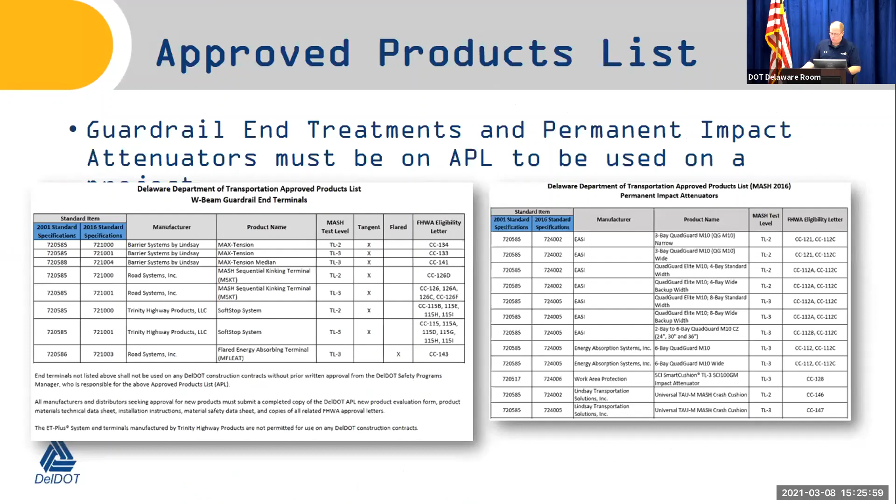Just a quick reminder on the approved products list. We have an approved products list for guardrail end treatments and permanent impact attenuators. These devices must be on the APL to be used on our projects moving forward now, and I believe that's covered in the specs and should be covered in source of supply as well. But if there's a question on what's allowed, just refer to the approved products list and that will show you what's currently approved for use in the state.

That, I believe, is it. So I will take any questions in the Q&A. We got time for a couple questions. Curb guardrail section, standard construction detail B18: is there any idea when the 31-inch height guardrail detail will be available?

So there is a design available, but it's not the best design that's available. There's been a lot of crash testing on this system, and really the issue is the head-on impact into the curb section of guardrail and to minimize damage due to rail rupture. A lot of testing has been done with sand barrels behind the guardrail, and that requires a lot of grading behind the system to place the sand barrels and to allow for run out when the vehicle does get behind the guardrail. I think we looked at this during the standard details update, and it was decided that this wasn't the best solution for us to use right now. So we opted to maintain the existing detail and monitor crash testing. There's not been a lot of crash testing since then, so it's something we're continuing to monitor.

Next question: is it acceptable to omit a post in a dual face guardrail installation? There's been no testing on that, so no, it is not. Good question, and that's all the questions we had.

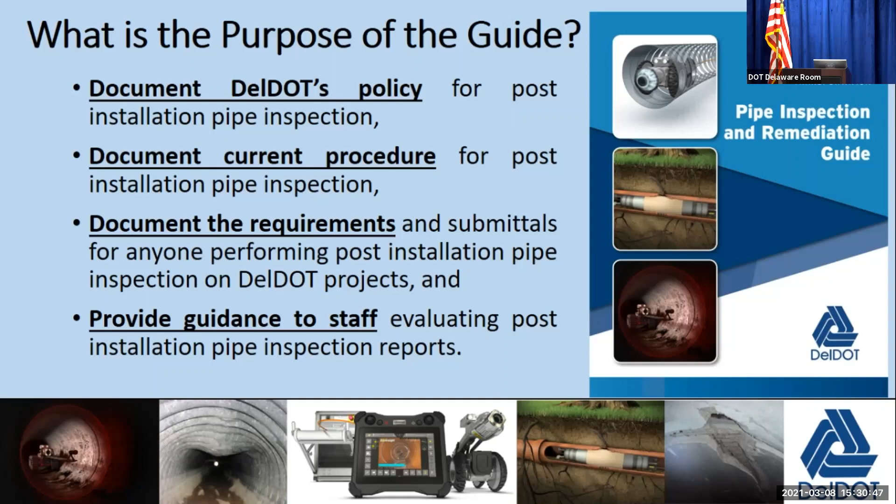Document DelDOT's policy for post-installation pipe inspection. Document DelDOT's recommended procedures for performing post-installation inspection. Document the requirements of staff performing these post-installation inspections. Document the submittals that the department will be requiring from these post-installation inspections. And finally, and most importantly, provide guidance to the department staff who will be evaluating the post-installation inspection reports.

One of the items we wanted to make very clear in this guide is that it is not a contract document. The guide is meant to compile industry best practices and does not have contract governance. The example on the screen comes from section 105.6, contract hierarchy of the 2020 DelDOT standard specifications. Nowhere in this list does it say pipe inspection remediation guide.

However, one thing we did want to do was write the guide in a way that it could be easily referenced in any pertinent professional services agreements. For example, the department is currently performing these post-installation pipe inspections under their construction inspection agreements. We wanted to make it easy for these agreements, or tasks under these agreements, to just reference the guide when creating their contractual language.

I want to next talk about how this guide is meant to apply to the various groups inside DelDOT. We wrote section 1.1, entitled Pipe Video Inspections During the Design Phase, to highlight this topic for our design groups. This guide provides best practices to follow as well as other general considerations. However, existing applications don't have to be measured to the same accuracy or precision as newly installed applications, because the passage of time will have allowed any defects in the pipes to more clearly present themselves.

One final item on this topic comes from our 2020 standard specifications. The standard specification states that the department will review all existing pipes for use in the final drainage system and will discuss the system's condition with the contractor before starting construction. These design phase videos can be a great tool in these discussions.

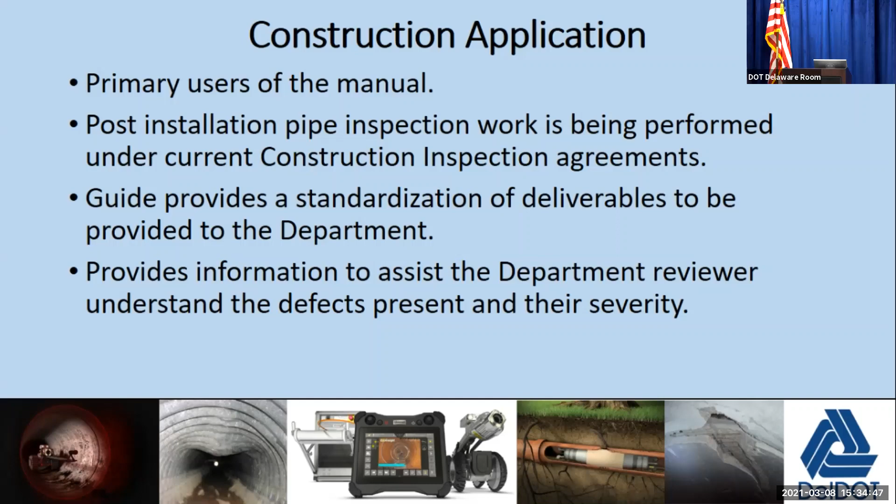The primary purpose of this guide is to assist the DelDOT engineer administering these tasks. The guide is also meant as a best practice for any permitted work which will occur inside of the right-of-way. However, unless it's specifically called out as a term in our agreement for acceptance, the guide in its requirement does not have any contract governance.

Chapter 2 is entitled Inspection Preparation and Procedures. This chapter walks the user through everything they need to know in order to properly set up for and then subsequently perform the inspection. This includes a brief discussion of the traffic control required, a discussion of setting up flow control, as all pipes should be inspected in a dry condition, a discussion of pipe cleaning, as we need to have a clean pipe surface in order to see, detect, and measure all the defects, and finally a discussion of the procedures to follow when performing a pipe inspection.

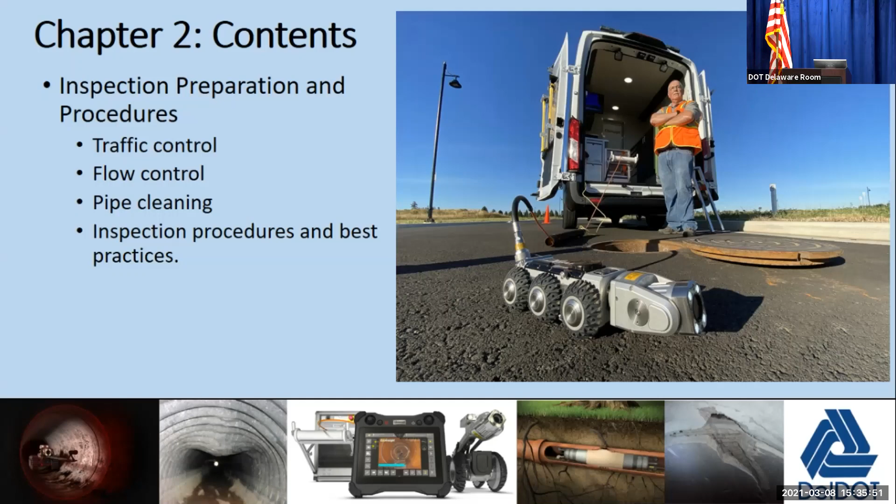Chapter 3 is all about the equipment required to perform this work. The goal of this chapter is to give a general understanding of the various tools that the engineer may see their CI using, as well as to give the engineer a good base of understanding of industry best practices. One of the things we recognized during the creation of this guide is that the technology and equipment used to perform this work is always going to change. So we wanted to try to provide a good base of information and make the guide as easy to update as possible as technology is updated.

For example, we wrote the discussion on camera requirements to be easily updated in the future. Chapter 4 of the guide is all about the deliverables that the department is going to require under the Professional Services Agreement. This is something we talked about with our construction staff as well as industry members to determine what information is most beneficial to the department.

Chapter 4 is going to require that the department receive a video for each pipe that is inspected. Please note that manual inspections will be allowed for pipes that are 48 inches and over. We are also going to require GIS data for the department's asset inventory and a storm drain report. We worked with DelDOT to determine what elements in the storm drain report we should standardize with forms as well. We wanted to make it easy for the engineer as well as the CI performing the work to use the tools, but we didn't want over-standardization to become burdensome.

We created a quick flowchart to help the user understand how the guide fits into the post-installation inspection process. Plus, who doesn't love a flowchart?

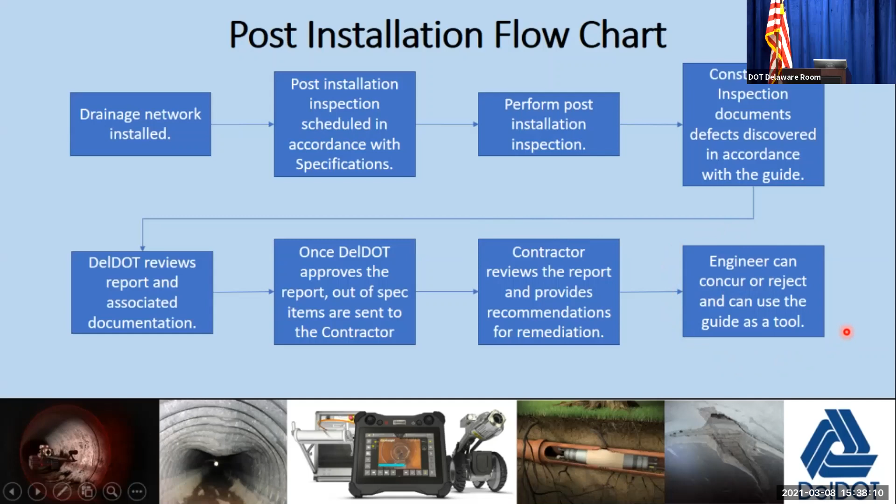The contractor reviews the report and provides recommendations for remediation. The engineer can concur or reject and can use this guide as a tool in that process.

Chapter 5 through 7 is really the meat and potatoes of this guide. The department currently allows multiple pipe materials to be used on their contracts. The allowable pipe materials on DelDOT contracts are discussed in DGM 120 and is based on the desired service life of the installation. Different pipe materials have different characteristics and, accordingly, different potential defects. These 3 chapters are intended to be a one-stop repository for each pipe material that could be used on a DelDOT contract.

Chapter 5 is on reinforced concrete pipe installations. Chapter 6 is on thermoplastic installations, and Chapter 7 is on corrugated metal pipe installations. Each chapter is formatted similarly, with a discussion on the general characteristics of the material, a section on the defects associated with the material, a discussion on the general characteristics and considerations associated with evaluating a defect found in the installation, and finally, suggested remediation flowcharts based on industry best practices.

Chapter 5 is dedicated to reinforced concrete pipe. This chapter categorizes and provides a definition of the typical concrete pipe defects: joint defects, cracking, misalignment, and spalling. Pictures are provided for identification purposes, and a discussion is included on the severity of each defect type.

The guide also includes several general considerations for the material based on concrete-specific considerations. Those include autogenous healing, pH, installation stabilization, and differential settlement.

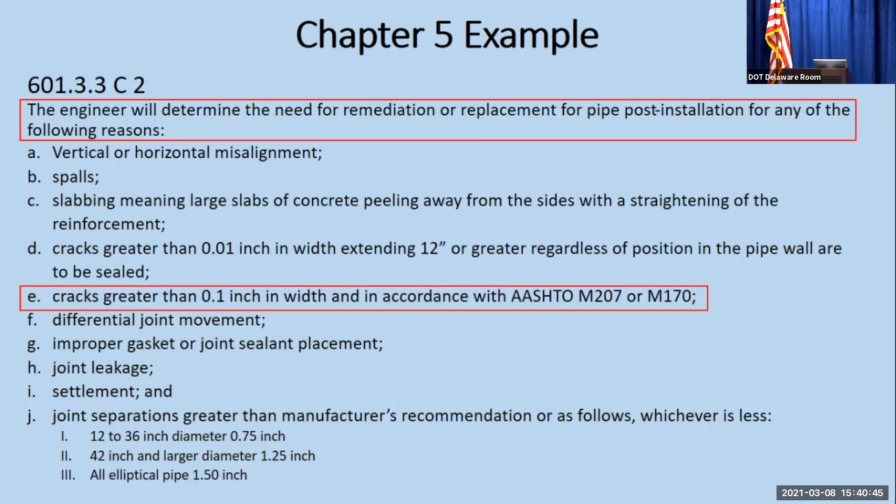Our example will be of a 0.15 inch wide crack with significant vertical offset. This will be considered a defect in Chapter 5 of this guide and will require the inspector performing the post-installation inspection to document and record the defect.

The defect is also considered a location where the engineer will determine the need for remediation or replacement, in accordance with section 601.3.3.C.2 items D and E.

DelDOT receives the inspection report from the CI and agrees to the report's findings. The DelDOT staff can then provide the information to the contractor, saying there are defects present that are considered out of compliance with the contract.

The engineer can then use the flowcharts and the information contained in this guide to assist as subsequent discussions occur on the magnitude of the required remediation or replacement.

For this example, let's say the department says the contractor needs to replace the pipe, and the contractor says they only need to perform a crack seal that will count as a remediation. The engineer can review the severity of the crack in accordance with this guide.

We start with the cracking flowchart. The crack is longitudinal, meaning parallel to the bedding, and it is larger than 0.01 inches in width, and there is vertical offset across the crack. Accordingly, we are kicked into the slabbing defect flowchart.

In the slabbing defect flowchart, we start with the question: do we have slabbing? The answer is yes, based on our last flowchart. We arrive at a decision point asking for the magnitude of the defect and potential stabilization of the pipe. We're now in the ballpark of performing a structural repair or replacing the pipe, so crack sealing is not going to be sufficient.

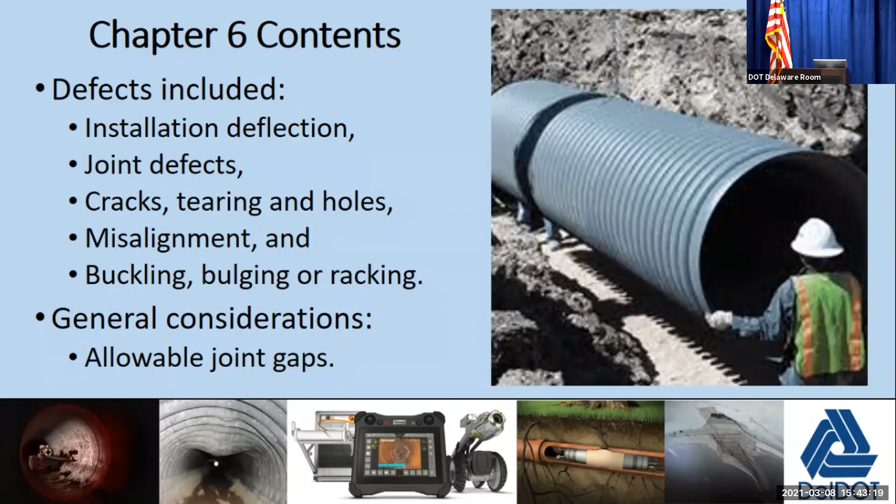We're now going to walk through another example, this time for Chapter 6 in regard to installation deflection. Again, the department defines what we consider defects in section 601.3.4 C2.

We say that the engineer will determine the need for remediation or replacement. Item A states that we will consider a 5% deflection value as a defect. One thing to note, mentioned previously, is that the guide is really meant to pick up where the standard specifications leave off. The guide and standard specifications were coordinated during development so that they are in agreement on the defect types as well as the critical measured values that the department would consider defects.

Therefore, the CI would need to document the deflection in accordance with the guide. The defect is also considered a defect in accordance with section 601.3.4.C.2, item A, and is therefore a location where the engineer will determine the need for remediation or replacement.

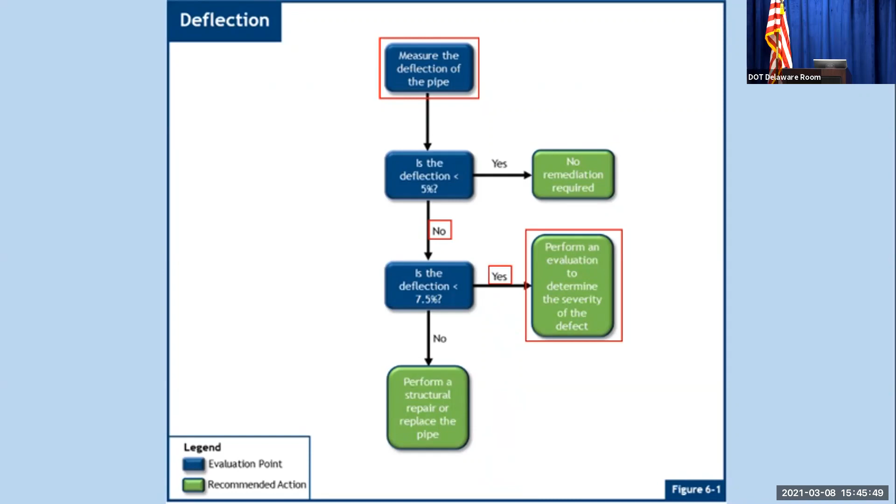The contractor can choose to perform this investigation to try to keep the pipe in place, or the engineer can dictate from the standard specification language that the pipe must be removed and replaced. One of the overall goals of the project was to allow flexibility where it made sense, but also to make it so the department didn't have to accept pipes that were not installed properly.

We also included a chapter on corrugated metal pipe. The department removed corrugated metal pipe from the 2020 standard specifications. However, we thought we should still include a chapter for legacy installations, as well as future installations where CMP is installed at locations where CMP is allowable per DGM 120. Because it's not in the standard specifications, and we already went through similar information for chapters 5 and 6, we're not going to get into more detail in chapter 7.

Chapter 8 is all about the various remediation techniques that are available. Our goal with this chapter was to discuss the more common operations and techniques rather than getting too specific on any one material or operation, because these technologies will change over time. The goal is to provide the engineer base information about the various techniques, and more importantly, help the engineer understand in what instances the techniques can be used.

In order to help the user understand how the various techniques relate to each other and to the work, we defined several terms, including two different types of defects. Localized point defects occur within a spot location of the pipe and are not applied linearly along the pipe. A linear defect occurs linearly along the pipe for a substantial length.

We also defined two different categories of remediation. Trenchless techniques do not require an open cut to perform the repair. Open techniques require an open cut to perform the repair. Our objective was to focus on trenchless techniques, as open cut techniques are more straightforward operations and can also be inspected more easily as they are performed.